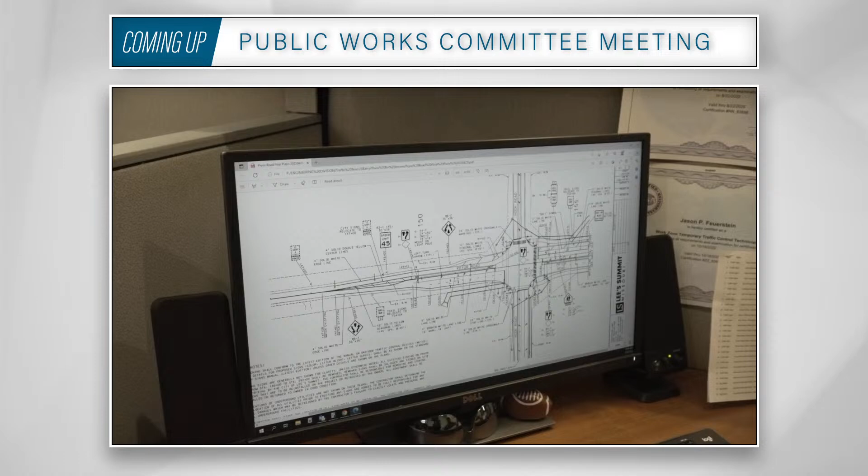Our traffic engineers go through and do field studies. They'll send us down an engineering work order for us to go out, place new signs or remove signs as needed. Coming from the material, our blanks come in and they're just aluminum blanks. We can put our white, our red, our fluorescent yellow, green, whatever. Basically what it looks like is just that there.

Throw it up into the roller. And once we got it covered, take it to our work table here, and Tim will cut the corners, cut all the excess off to where it's lined up right.

As far as the plotter and the software that we use, there's a street name sign there, and he's gonna go ahead and print that out on the plotter so you can see the plotter and how it operates and runs. There's standards for the height, even just on letters on the sign blank. Basically what we have on the computer there is pretty much set up to those. And it goes through, it's got a very small but sharp needle that goes through and cuts everything out letter by letter.

Once that's done cutting, our next stage would be bringing it over here. Currently picking out the sign letters right now. We call it weeding or picking, or however you want to call it. Next, putting it on the transfer tape.

Then after it's taped, we bring it over to the roller. That's where we apply it to the actual sign blank. We'll roll it through one time just to get the air bubbles out. And the last stage is basically just taking the transfer tape off the front of it. And there's a finished product of the street name sign.

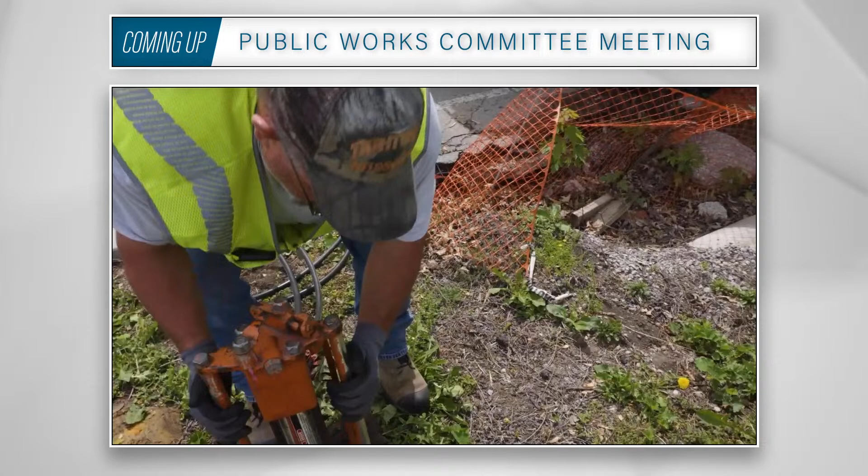Then once the base is installed, we'll go ahead and put the post in there. We've come up perfect. And that's how we do it. Simple, quick.

Smith Hat Company is coming to downtown Lee's Summit. Purchase a variety of hats, including cowboy or cowgirl hats, or unleash your creativity and design a one-of-a-kind custom hat, choosing from premium materials, unique embellishments, and expert craftsmanship. Smith Hat Company is hanging its hat here in spring 2025.

Summit Play Village is coming to South Lee's Summit near Raintree. The indoor children's playground will be for children 8 and under to promote creativity, explore family-friendly activities, and have fun. Summit Play Village is set to open in April 2025.

Street food sensation turned fast casual hit Dave's Hot Chicken is bringing the heat to Lee's Summit. Specializing in Nashville-style hot chicken and serving tenders and sliders, Dave's Hot Chicken will be arriving to Summit Woods in summer 2025.

Lee's Summit is getting 3 ice cream shops across the city. Howdy Homemade Ice Cream will be scooping its way into the Chapel Ridge Shopping Center. Howdy Homemade creates a place where everyone belongs, a shop dedicated to creating jobs for people with disabilities. The amazing ice cream served by amazing people will be coming in summer 2025.

Brewster's Ice Cream will serve Summit Woods Crossing with over 24 fresh, rotating flavors made daily. The shop offers 150 homemade ice cream flavors, including sherbets and sorbets, as well as ice cream cakes and pies. Brewster's Ice Cream is coming in summer 2025.

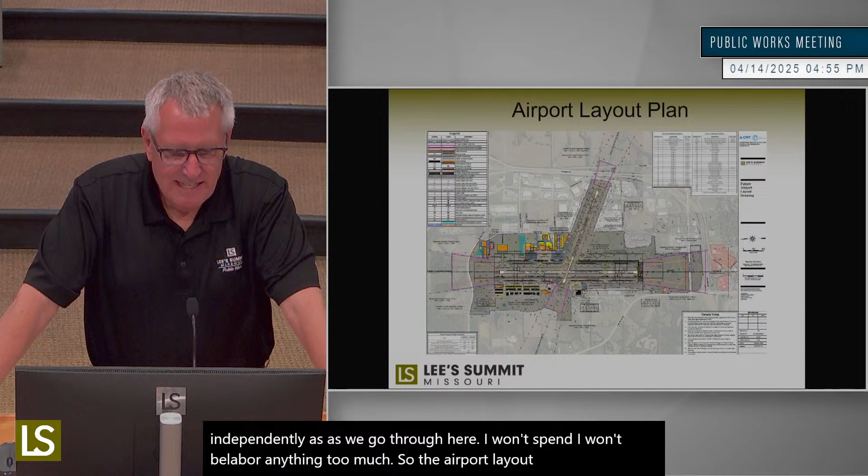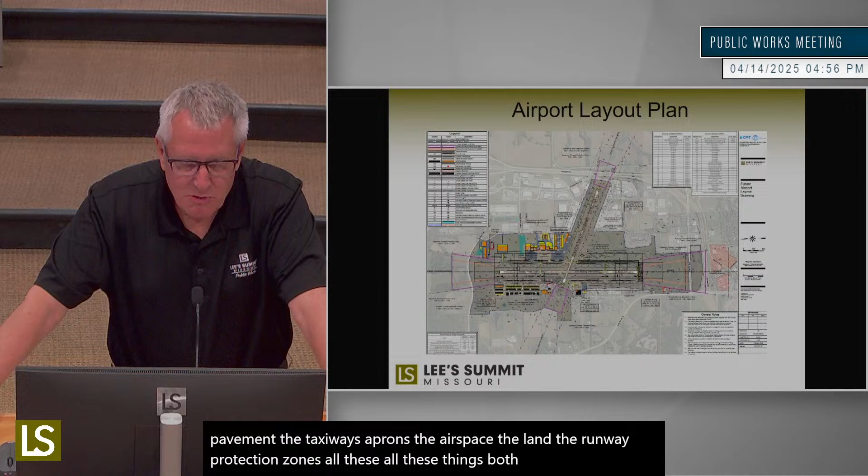So the airport layout plan, again, this is one sheet of several. It really is the inventory of our airport facilities, both current and proposed. When you think about inventory, you think about buildings, but this covers buildings, pavement, taxiways, aprons, airspace, land, runway protection zones - all these things, both tangible and intangible, that we own and control as part of the airport and the airport's airspace.

The biggest reason for this is, one, we show the existing facilities, and then we show what we want in the future, where we see the airport going, how we see it developing. This is obviously very integral with our master plan. Where are we putting hangars? Where are we putting aprons? Where are we putting the air traffic control tower? So in the future, when a hangar developer comes in and says, hey, I want to build a hangar here, we show them, based on our master plan, this is where you're going to go.

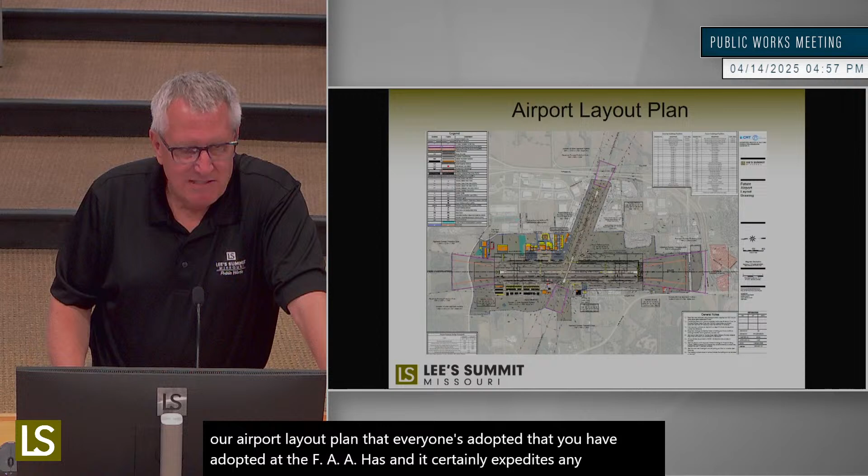We have to submit those plans to the FAA for an airspace study. First thing they're going to do is grab the airport layout plan - are we proposing a project that's in alignment with our airport layout plan that everyone's adopted, that the FAA has? It certainly expedites any airspace study if we show we're putting a hangar right where we said a hangar would be. We already know everything's fine. So that's really the high-level overview of what the airport layout plan is.

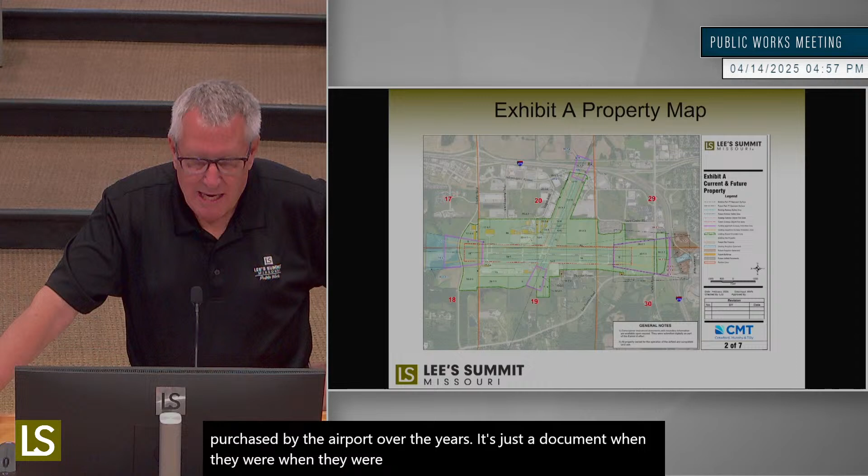The Exhibit A property map, like I said, is really a collection of all the properties that have been purchased by the airport over the years. It's just a document of when they were acquired, how they were acquired, local funds or grant funds. But like the ALP, this is also current and future property. So we will show all the current property that we have, but then we'll show potentially future property that we'll need to buy to protect future airspace.

One of the things we look at in the future is dropping the approach minimums to runway 36. Well, if we do that, we're going to have to purchase some additional avigation easements, and this map would show where those properties are and what would impact those decisions, what would impact what property we would have to buy.

A lot of these things we've talked about over the last couple of years through committee and council. We're all well aware of the air traffic control tower and the desire to eventually have an air traffic control tower at the Lee's Summit Regional Airport. We were recently accepted into the contract tower program, so we went ahead with the preliminary site study.

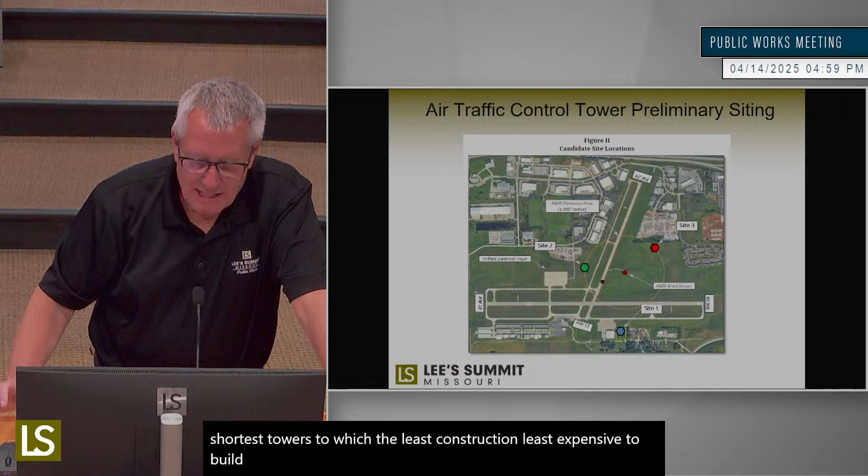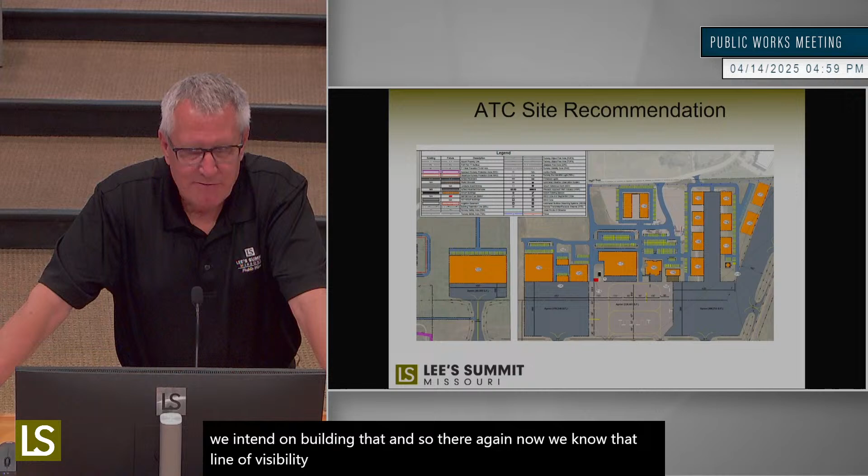And if you look at one of the sheets on the airport layout plan there on the lower right, you'll see the little orange circle - that's the air traffic control tower. So that's in alignment with the site study, and now it shows on our airport layout plan where we intend on building that. So now we know that line of visibility we have to protect, and as we develop the airport, we know that protected space and can plan accordingly.

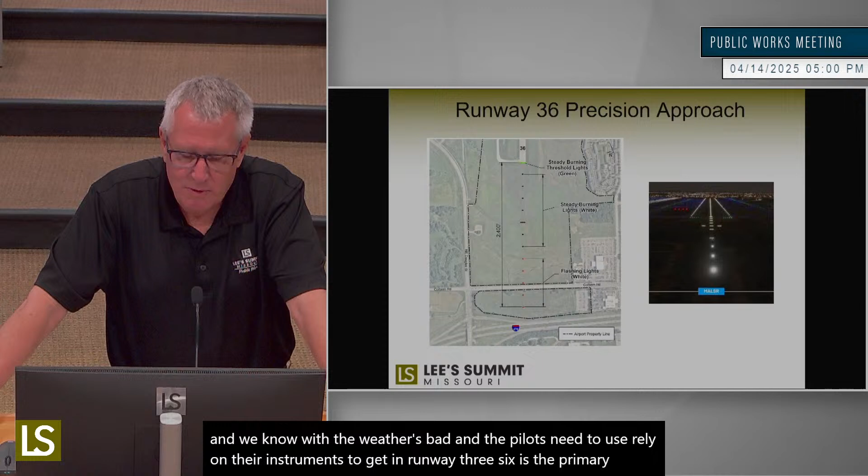Another one of the deliverables was the Runway 36 precision approach feasibility. Looking at that right now, our runway minimums for Runway 36, which is our primary runway during instrument conditions when it's wet or the weather's bad and pilots need to rely on their instruments to get in. Right now we have minimums of 7/8 mile visibility, and I believe it's a 320-foot minimum descent altitude. To get that to a precision approach, which would be a half-mile visibility and a 200-foot descent altitude, what would be required? There's really two options.

One is a full-blown ILS, or instrument landing system, which is a ground-based navigation system. Or two would be installing a MALSR, which is a medium-intensity runway lighting system that also provides cues on the runway alignment. You've probably seen these driving down the road, where you see the string of lights and the strobes shooting towards the runway. That's what these are.

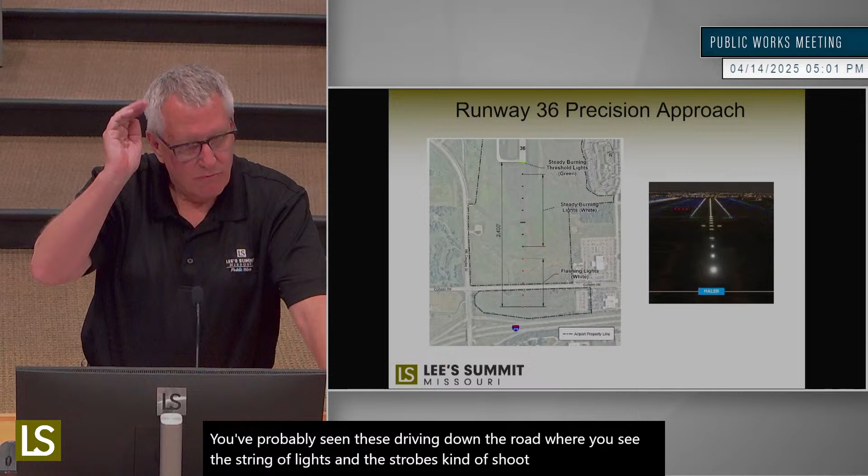Looking at the traffic and the amount of time this approach is in use, the recommendation is not a full-blown ILS. It does get your minimum descent altitude down to 200 and visibility to a half, but they're very costly to maintain, and the benefit-cost doesn't seem to truly be there. So the recommendation, and what we show in the ALP, is just the lighting system. That gets us to our half-mile visibility but keeps the minimum descent altitude at 320. So that is the recommendation on the 36 approach.

The obstacle action plan. This is the end of Runway 36, where we have our biggest problems with obstacles penetrating, or potentially penetrating, protected airspace. When I talk about Part 77 airspace, that's kind of an alert airspace. If we have trees and buildings in the Part 77 space, that means you're getting close to some protected airspace and need to look at these penetrations. So we do an obstacle action plan.

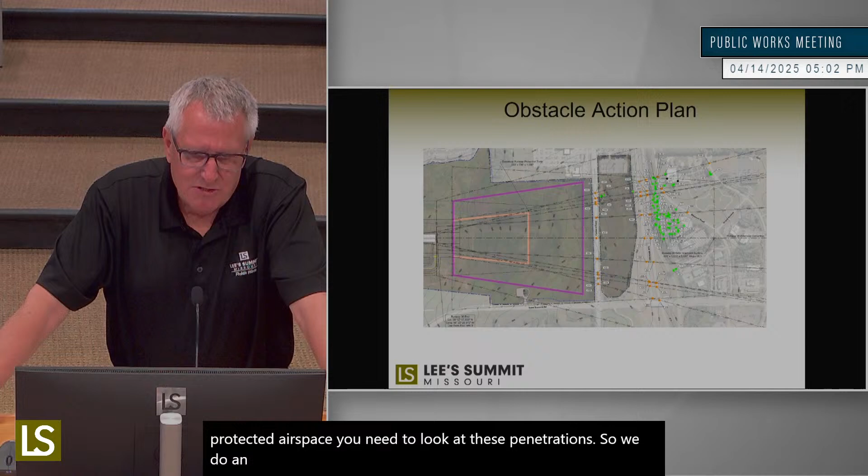Obviously, when you go out purchasing property and removing trees, it can be very expensive, and they're kind of scattered about. So the obstacle action plan gives us a way to prioritize where we want to spend our money, where we need to spend it, and where we don't necessarily need to. This will show both existing and future conditions: what the obstacles look like with 7/8 mile visibility, what they look like with half-mile visibility, and what it would take to go to that lower descent altitude or lower visibility.

Not really associated with the airport layout plan, but part of the Phase 2 Master Plan update, was the wildlife hazard assessment. You may recall over the last couple of years we've had contracts with the USDA to do this study for us. Last year we had a contract for rodenticide to take care of the rodents on the ground, which meant the birds of prey would go elsewhere and not conflict with the aircraft. We also had a contract removing coyotes and geese primarily from the runway.

So that's really it for the airport master plan update Phase 2. Are there any questions specific to that? Since I have your attention after the questions, I'll give a brief update on our airport renaming. So I'll pause here for questions on the resolution.

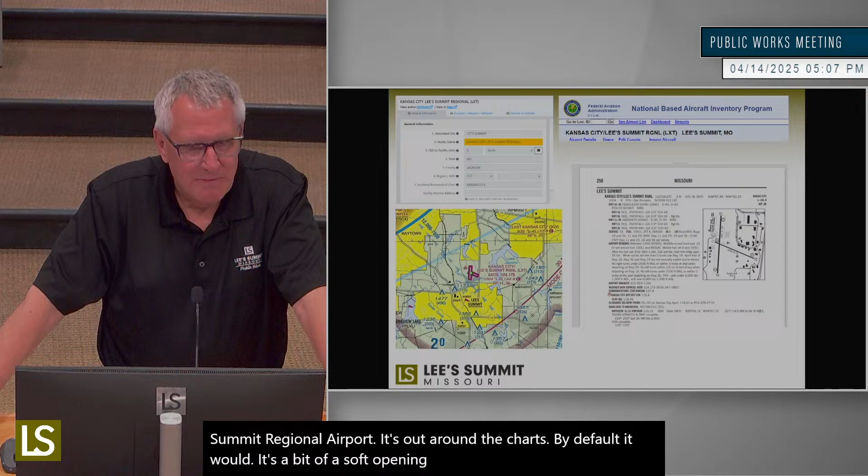Sure enough, as we go into our aviation charts on the website, you'll start to see Kansas City Lee's Summit Regional Airport on the chart. So it's happened. We are now officially the Kansas City Lee's Summit Regional Airport. It's out there on the charts. By default, it's a bit of a soft opening. We get it approved, and then little by little, all the charts are updated. And we've had transient aircraft coming in calling in Kansas City Lee's Summit Regional traffic.

So the next step, as we talked about, was once that got out there, was the marketing. And that's kind of the fun part.

Summit Aero, as you recall, is the name for the city-run FBO, fixed base operators, that provide all the world-class, excellent customer service at the airport. What you see here is the end result of a lot of collaboration with the aviation community, with our fuel vendor, with creative services, looking through many different options, maybe a little bit of help from AI, I'm not saying. But through all that process, this is the logo that we came up with for Summit Aero. It looks really good on shirts. We're excited to move into Hangar 2 where we can start branding this in full force.

Kansas City Lee's Summit Regional Airport. We also wanted to have a logo for the airport. Again, we went through a lot of different thoughts and concepts, looked at different airports. We really wanted something that was simple, yet bold, and we came up with this design. Honestly, I can't even say how we ended up on this design, because we had a lot of stuff out there, but everyone kind of gravitated to this.

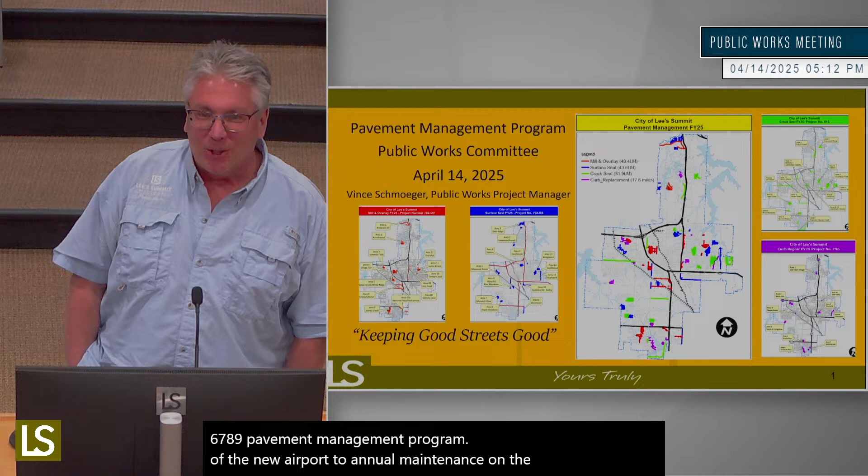Excitement of a new airport aside, this covers annual maintenance on the pavements and curbings. This is going to be a review of our four main projects on pavement management: the curb, the overlay, the surface seal, and the crack seal. The pictures currently on the screen were last year's programs. With the individual projects and then the yellow label, you can see when you put them all together, it does look like we cover a lot of ground every year.

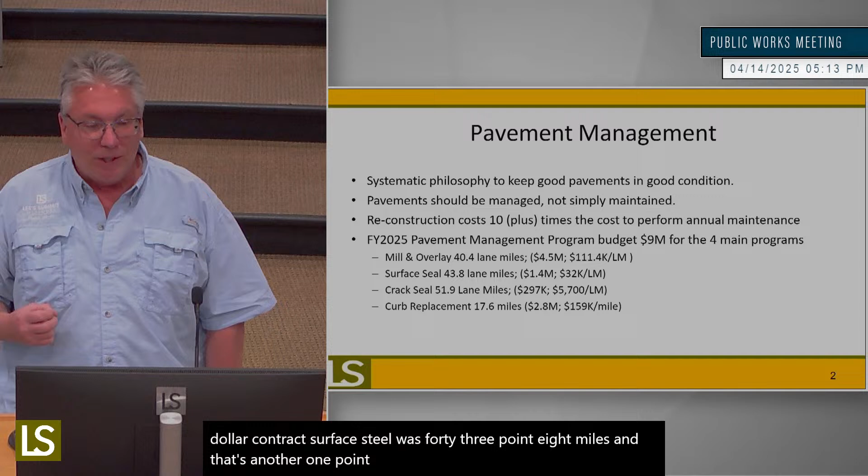Here's just the idea of how many miles of street we have. Asphalt, we actually have over 1,000 miles of asphalt street, divided into over 5,000 sections. So trying to keep track of all the sections and how they relate to a neighborhood - a section is simply one intersection to the next as you're going up a street. You may have a 1,000-foot section, or a 100-foot section on some of the older areas where we have offset intersections.

Funding - our primary funding source for this is the half-cent transportation sales tax. We also get money from the 15-year CIP tax, and we have in the past had some money come in on special bond issues that rebuilt curb, getting a bunch of arterial, some of our larger streets, curbs redone as part of that. Maintenance is also supplemented with the operations division - they use $204,000 a year for curb replacement and another $236,000 for potholes, plus another $1 million for working on larger repairs in the streets.

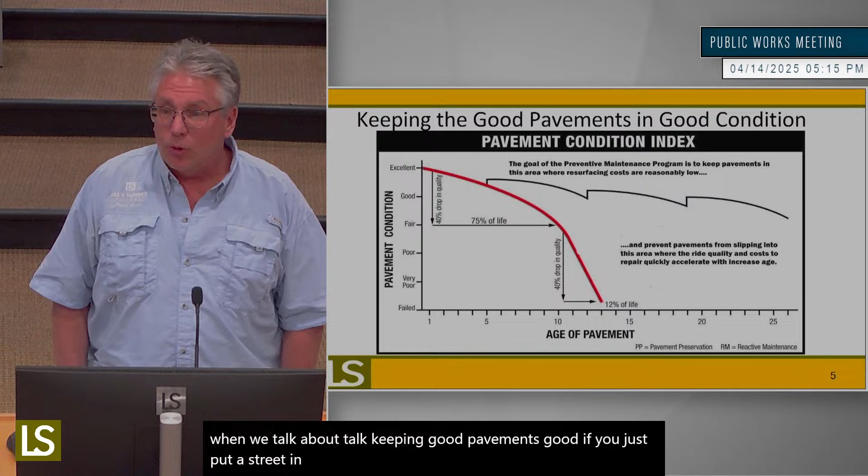We talk about keeping good pavements good. If you just put a street in and don't do anything with it, this is the red line - it just falls off, and over time it naturally decays into gravel again. But if we get in there every so often and do the overlays, the surface seals, or the crack seals, we protect the street and we're able to extend the life of the streets.

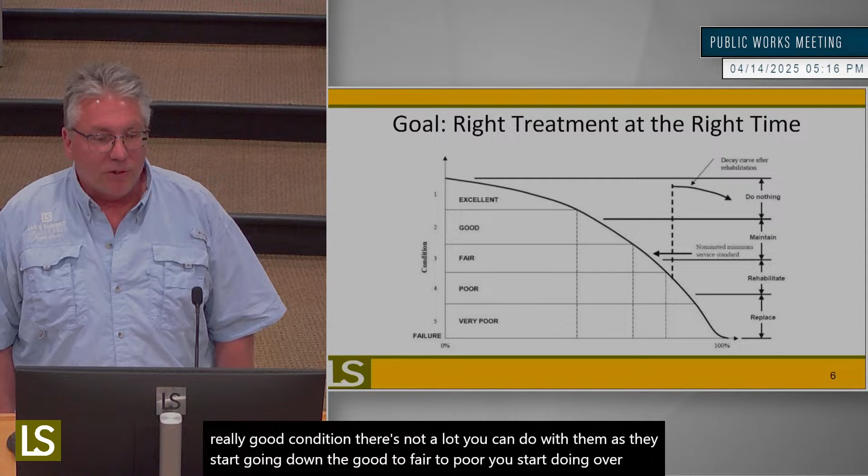Similar to the previous one, this chart gives you an idea of when streets are in really good condition, there's not a lot you can do with them. As they start going down to good, to fair, to poor, you start doing overlays. Good and fair condition is more of a crack seal and surface seal program. When you get down into poor conditions, then you're definitely getting into a mill and overlay, and we're trying to get, currently we do about 20 to 25 years on an overlay.

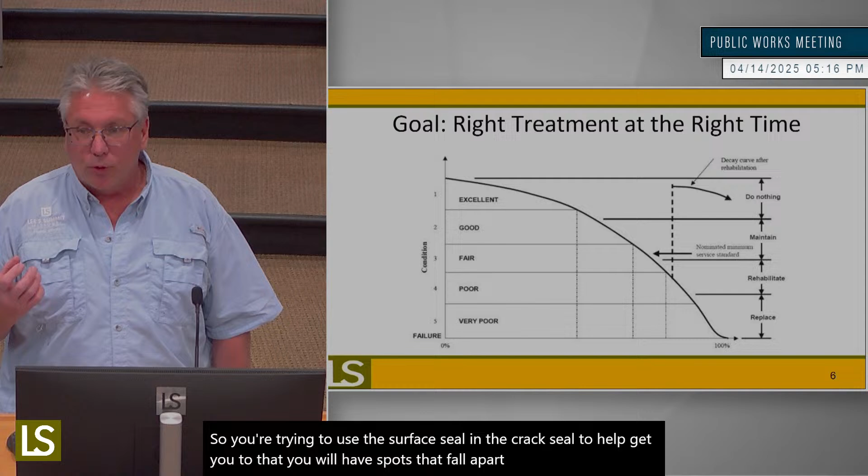So you're trying to use the surface seal and crack seal to help get you to that point. You will have spots that fall apart, potholes or rutting, that operations can come in and actually make repairs on these streets.

So just kind of our pavement cycle, we assess what's the condition of the pavement, analyze it and put it together in our Paver program and our GIS maps, and see what our funding is going to be for the year.

Then we create a plan, trying to stick with neighborhoods for cost effectiveness. When you're doing an overlay across large areas versus a street here and a street there, you're going to start paying a lot of transportation fees for the contractor.

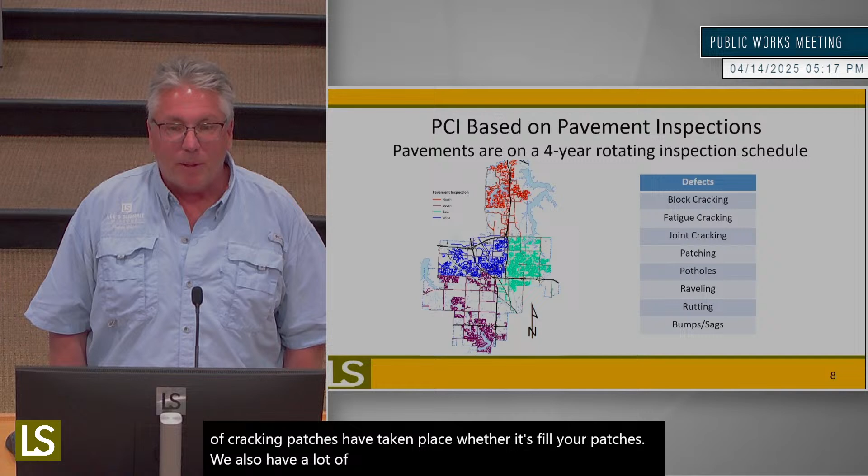Our pavement inspections are based on a 4-year rotating basis, and we go in and look for different types of cracking, patches that have taken place, whether it's failure patches or utility patches, shoving, rutting, and whether the road is rough, and what's causing that. These are the type of items we look at when inspecting the streets.

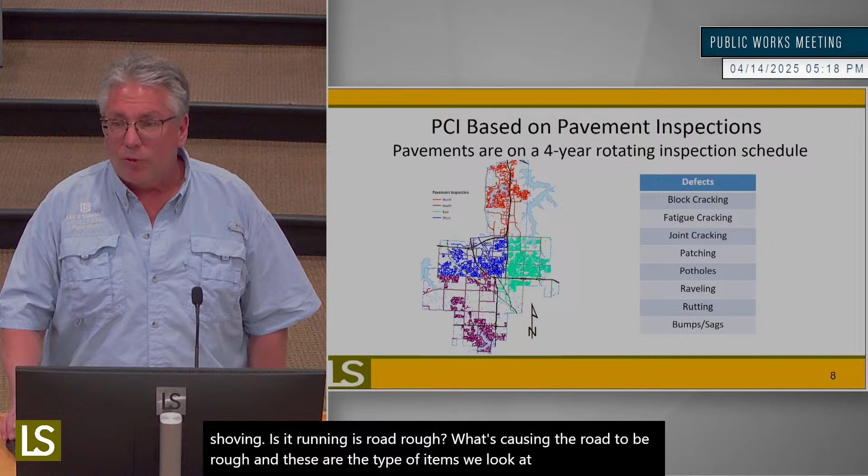After the street inspection, we plug it all into our program called Paver, and it kicks out numbers on what's the condition of the streets, from 0, which is a very bad street, to 100, which is a new or freshly overlaid street. Our current average is 73, which we feel is pretty exceptional.

And we get up into the 75 to 89 range, it's more of a surface seal and crack seal program, which usually takes place about seven years after an overlay, sometimes 10 years. This has been kind of the paving history in Lee's Summit.

1992 was the first year we actually came up with a design and construction manual. This is a set of standards used to dictate how we build streets - not where, but how. Before, it had been on an approval basis. This actually gave us specifics: we're going to use this much asphalt, we're going to use this type of asphalt.

This initial program, because of the building going on at the time, we had a lot of input on this from the development community, the people that build the roads, the developer crowd - just what can they do to keep it. We're not asking for the gold standard necessarily, but would still give us a solid street.

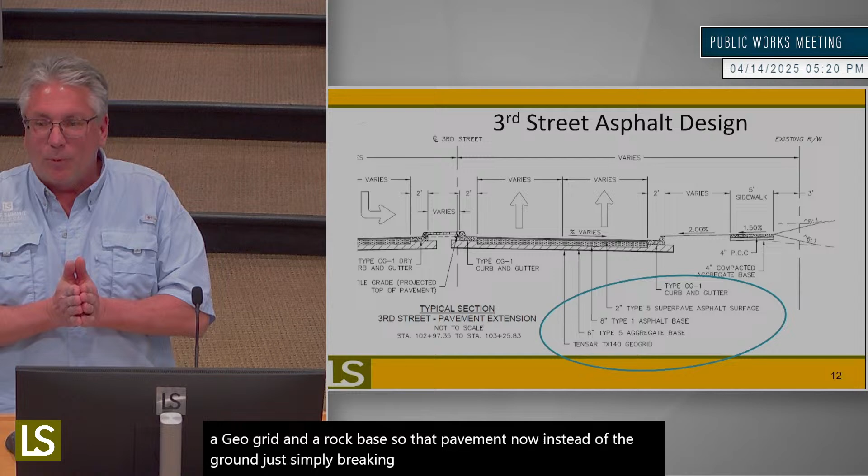In 2011, we actually came up with a 35-year lifespan. Prior to this, our asphalt streets were actually put on a clay base, which dries out and cracks. So in 2011, we were able to go to this - in this circled area, you can see where underneath the base we actually have a geogrid and a rock base. So that pavement now, instead of the ground simply breaking and reflecting up through the street, it actually has a place to slide and make movement without affecting the road near as much.

And then last year, 2024, we updated to a higher grade of asphalt called Superpave. It has better materials in the aggregate and increased the amount of oil in there, so it's becoming smoother and tighter, more water resistant, and should hold up better and be longer between crack seals and surface seals.

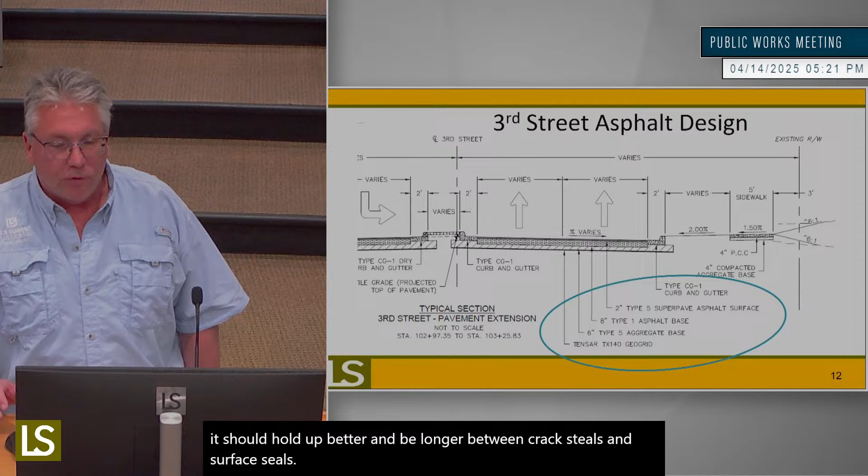Okay, this is 3rd Street. This was the design for 3rd Street between Murray and Pryor a couple years back.

So we're working to improve initial construction, doing things like better aggregate and oil. Mill and fill construction is just a different way to pave, to where we have stronger edges on the wider road, so the pavement actually gets fully rolled and compacted together.

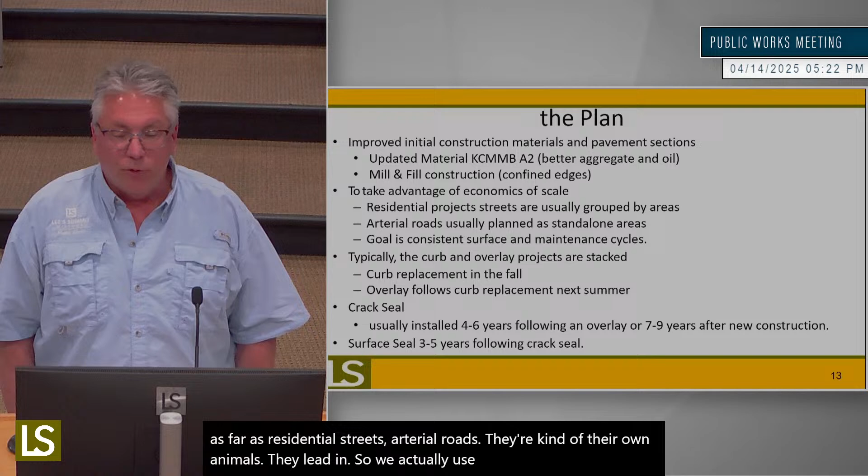Keep taking advantage of the economics of scale, keeping projects together as far as residential streets. Arterial roads are kind of their own animal, so we actually use those more as standalone projects. And we stack our curbs in our overlay programs. You'll notice that roads that we put curbs on are typically overlaid the following year. This year's an example: we have 15 areas on the overlay program, 10 of those from curb replacement programs last year.

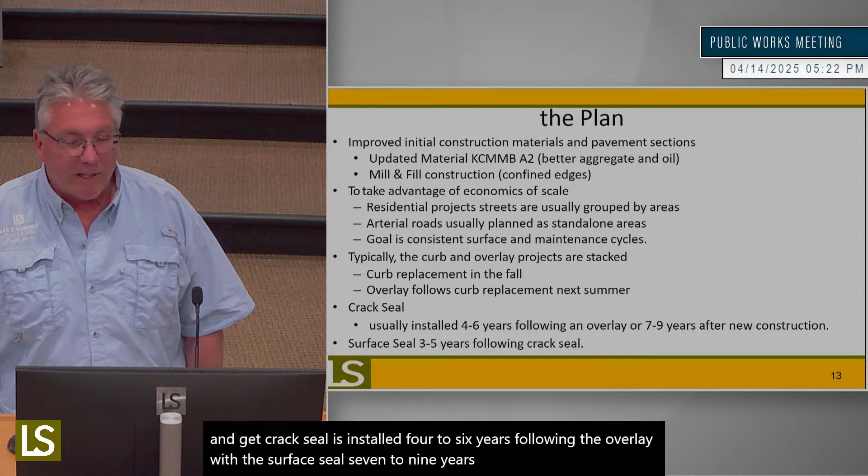Just a quick synopsis of the programs. I've got these in order that we typically do them: starting with curb replacement, then overlay, crack seal, and then surface seal.

So curb replacement, we've seen curbs around Lee's Summit like this, ones we're trying to replace. We've got most of the bad ones out of this program, though you'll still find them here or there. It replaces the damaged, deteriorating curb, and we do update the sidewalk ramps to current ADA standards so we're in compliance whenever we're going through there. Last year's program was 104 ramps.

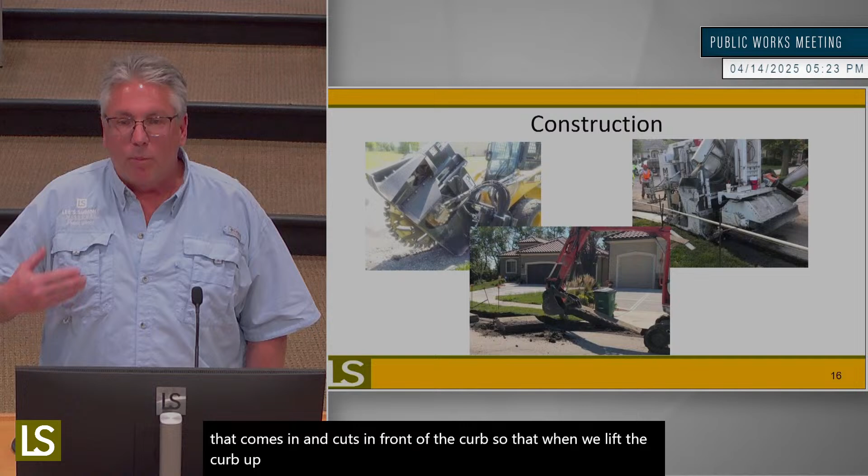For construction, top left, you have the big wheel that comes in and cuts in front of the curb so that when we lift the curb up, it's not going back into the yard. We're trying to lift it up as clean as we can without disrupting the yard. The top right picture is the curb machine putting the curb back down. This is actually an older picture though - the new curb machines are using GPS. They don't even have a line to follow anymore, it's all through GPS. Some pretty good technology they're using out there.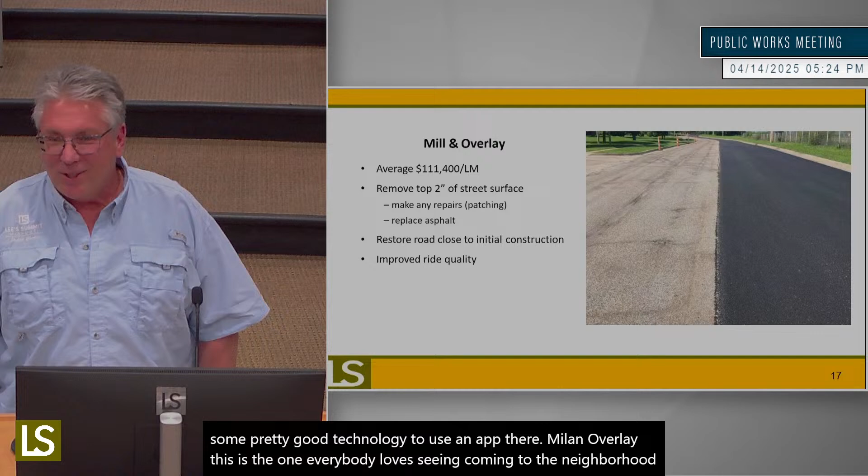Mill and Overlay - this is the one everybody loves seeing coming to their neighborhood because it means we're getting new streets. We remove the top 2 inches of street, restore the road close to initial construction, and improve ride quality.

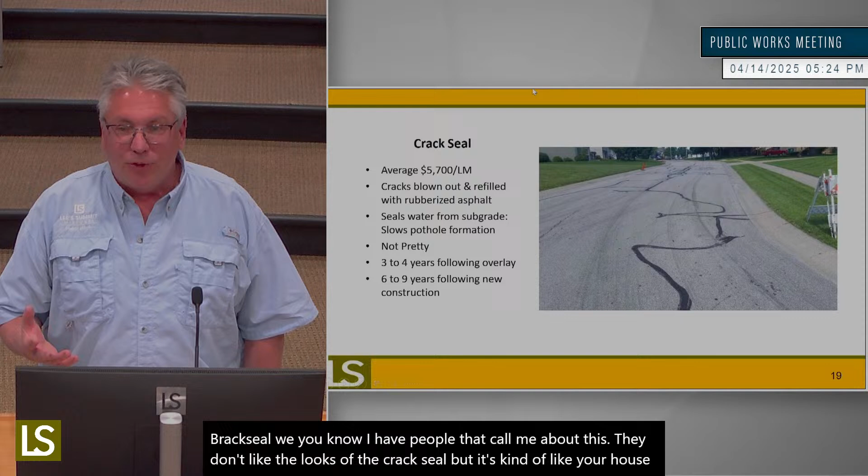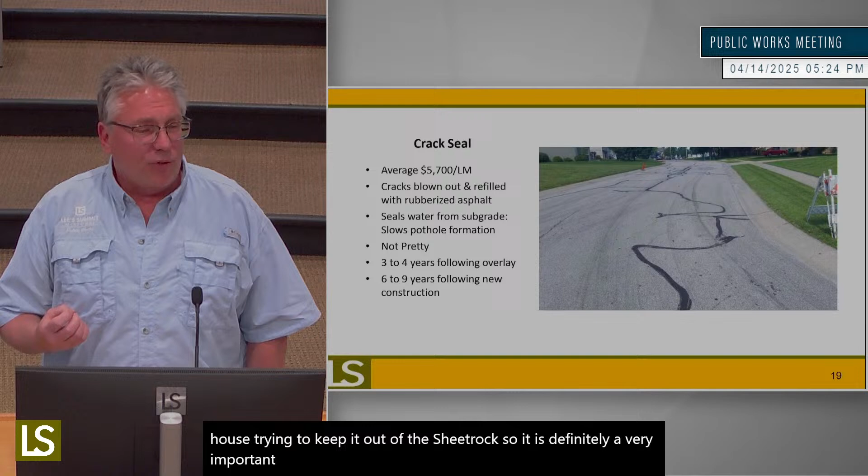Crack seal - I have people that call me about this. They don't like the looks of the crack seal, but it's kind of like your house when you use caulking in the shower or around the sinks. You're trying to keep the water from getting through the subgrade, like keeping it out of the sheetrock in a house. So it's definitely very important and is actually one of the most economical processes we can use.

For construction, it's hot tar asphalt put in, and these guys with the squeegees are just trying to keep it tight and not let it go all over the place.

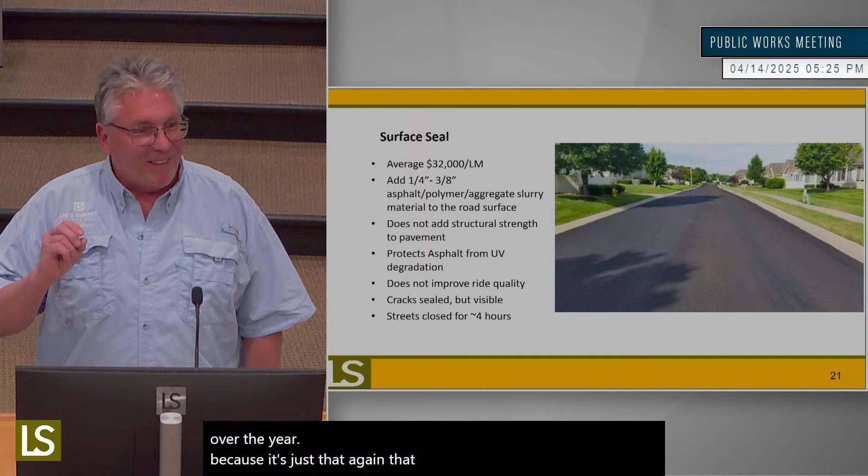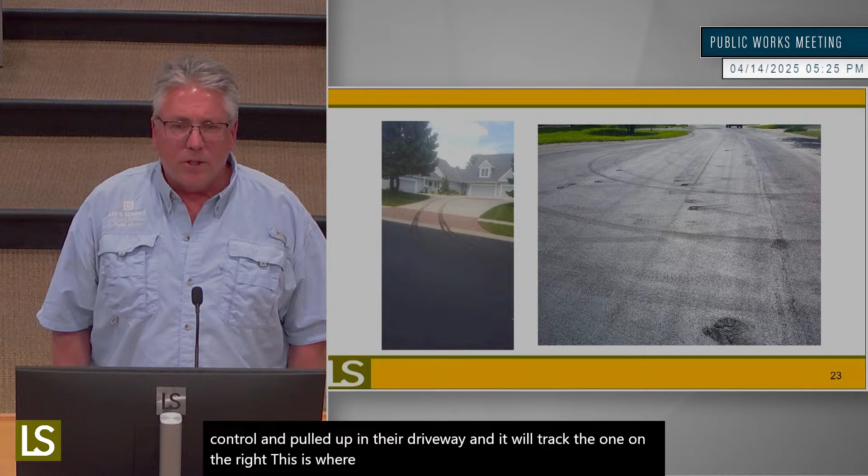That being said, the picture on the left is just somebody that went through the traffic control and pulled up in their driveway, and it will track. The one on the right, this is where I get a lot of calls, especially in the cul-de-sacs with people making turning movements, stopping and going out of their driveways. These are actually okay. This is right after, within the first week, this material calms down and loses its shine. It looks more like asphalt that's been driven on. These marks will still be there, but if you look at them, they're in the surface, not digging down through the material.

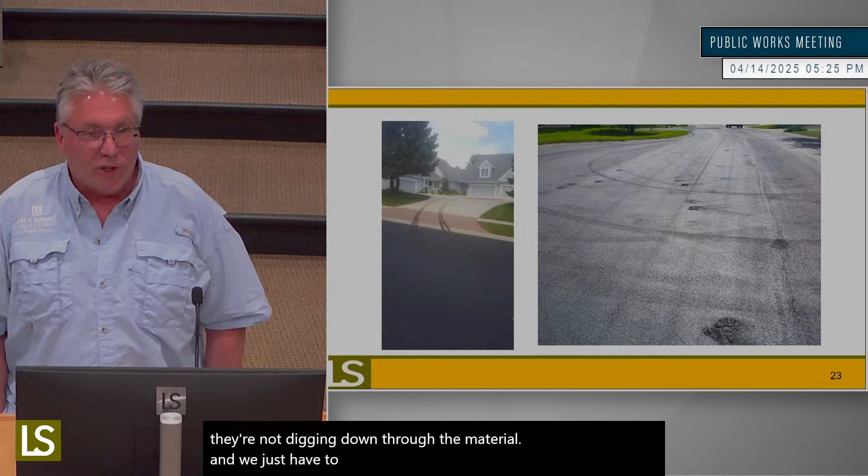We just have to watch - we try to coordinate with the trash company so they can be down for a couple days. Doesn't always work, but we try.

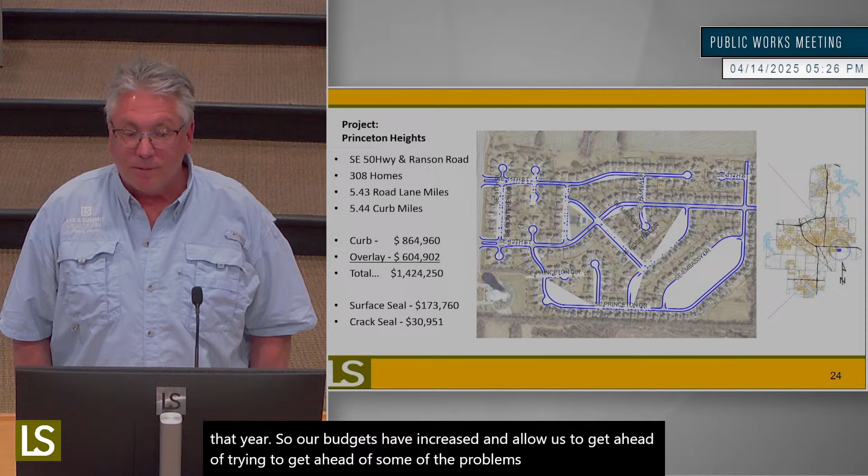So I know when we overlaid this in 2009, 16 years ago, that was the only project we had in curb that year. Our budgets have increased and allow us to try to get ahead of some of the problems we have. Surface seal would be about $175,000, and crack seal is $30,000. That's why we like getting in the crack seal - if we can preserve the road before it gets wet underneath, causing potholes and failures, we're definitely money ahead. I believe that's it. Any questions?

Thank you. Councilmember Rader? Here. So Vince, I'm guessing that you prioritize where you're going by condition, but how do you know? Do you use the GIS mapping service to determine the condition of it, or do you guys actually drive around everywhere?

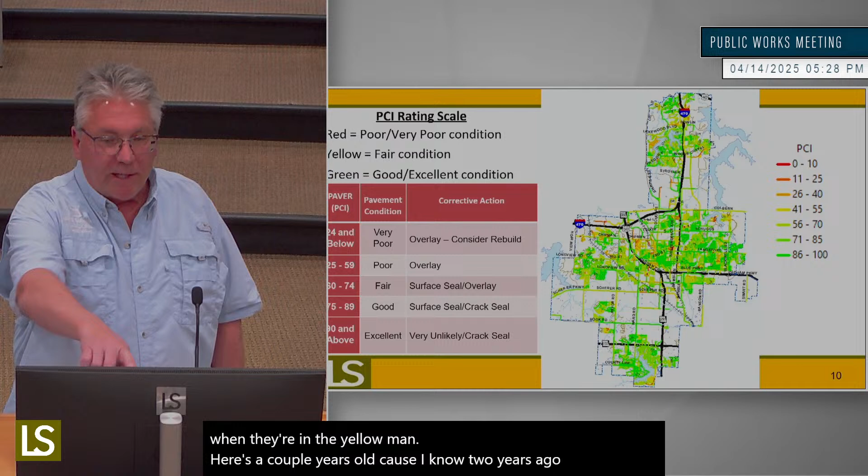This map is a couple years old, because I know 2 years ago up there in Lakewood, the tree name streets have all been overlaid. But we look at this, and as we inspect streets, the colors change, and we can look for hot spots. And we always drive and confirm what we're looking at to make sure everything's in the condition we think it is on the maps.

That technology that you can use - isn't it fun? It's fun, yeah. Yeah.

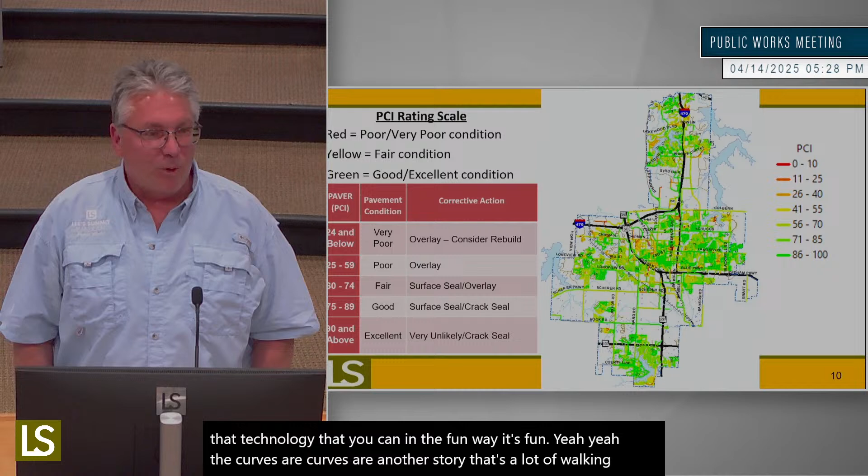The curbs are another story - that's a lot of walking. We know where they're at and the years built. We have kind of the same map, but it's still more of a walking and making sure. Thank you. Thank you, Chair.

I don't know who this question's for, and it's really not in here, but I'll ask it. Ward Road past 150, where we went ahead and remade that road - it's in Cass County, but it's almost into like Peculiar, or whatever that turns into right there. Raymore, right? And it's concrete.

County line - we concreted at the county line to 163rd Street. And that's the strip. Raymore just did the extension from there out to 58. So how long ago did we concrete that? Do you remember? Is that 7 years now? 5?

So on that, I remember when we were concreting that, he said we were going to look at that and see if it lasted longer than some of the others. Have any idea of that yet? Hey, sorry, I should have waited.

Okay, good evening, George Binger, city engineer. Concrete definitely has a longer lifespan and requires a lot less maintenance. If you think in terms of Ward Road in front of Lee's Summit West High School, it was installed in 1999. For that road, the only maintenance we've done is some panel replacement - a few locations where the slabs have cracked or heaved, we've gone in and replaced that. But we haven't had to do any surface maintenance or anything of that nature.

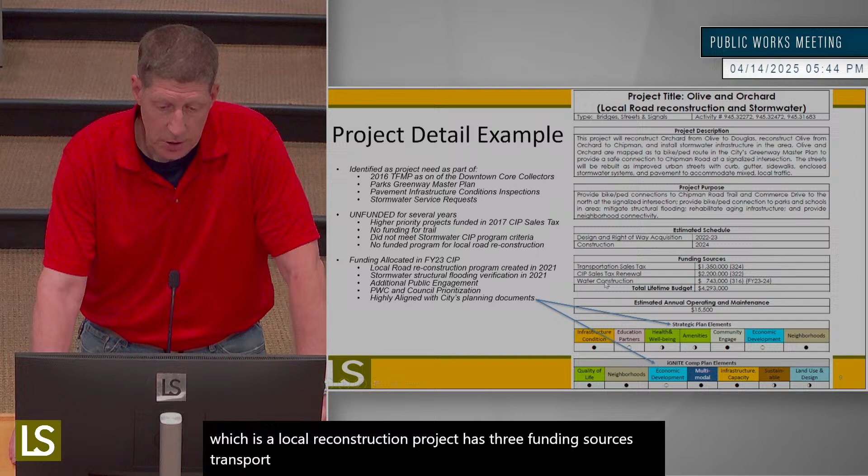So in the CIP, this is an example of a detail sheet. What this is trying to show is we'll walk through the purpose, or the project description. We identify the specific funding sources here, so you can see that this particular project, Olive and Orchard, which is a local reconstruction project, has 3 funding sources: transportation sales tax, our CIP sales tax, which also includes stormwater, and then water construction because there's some water main relocation.

We try to tie it back to our strategic plan and our comprehensive plan. With the strategic plan, we're kind of looking at current condition, and with Ignite, we're looking at the growth or future condition. That's how these differ a little bit in our bubble charts.

So when you look at the CIP, that's what you see in the detail sheets. These are available online in the online version. They will not be in the summary report presented tomorrow.

Okay, so talk a little bit about revenue and expenses. Again, this is getting back to this cash flow, looking at the CIP sales tax. When this was first presented in 2016 and 17, we were looking at $150 million over these 15 years. That's what this gold line is representing. So that's how this program was developed.

Since then, we have added the use tax, which is providing about $2 million per year to this program. Sales tax revenues have exceeded our expectations. And then, as I mentioned, we have significant grant funding coming into these capital projects.

So what we're looking at here, the red line is showing our actual expenses to date, and this includes inflation. When we looked at 2017, obviously we weren't forecasting COVID. We weren't forecasting 20% increases or 30% increases in construction costs at that time. Now, more recently, that construction cost index is starting to level out. I think it's closer to 3.2% average over the last 3 years, so we're starting to see that level back out and be a little more predictable.

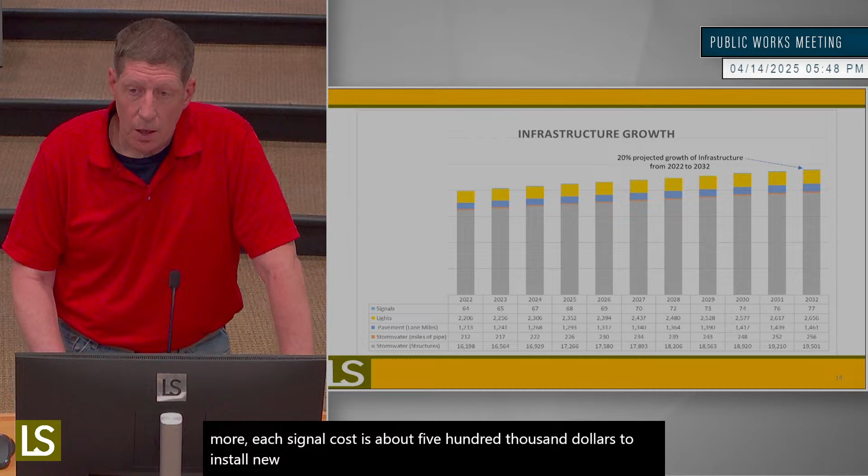So we're looking at a 20% growth of infrastructure from 2022 to 2032. As you can see here, just the raw numbers, we're adding signals. We're at 64 or 67 signals, and we're looking at adding more. Each signal costs about $500,000 to install new, and then there's the annual maintenance cost, just the electricity. Controllers have to be replaced every 5 to 10 years, the video detection too, so there's a maintenance cost associated with that. Street lighting, as it's added, increases our annual utility billing, which again is coming out of the operating budget.

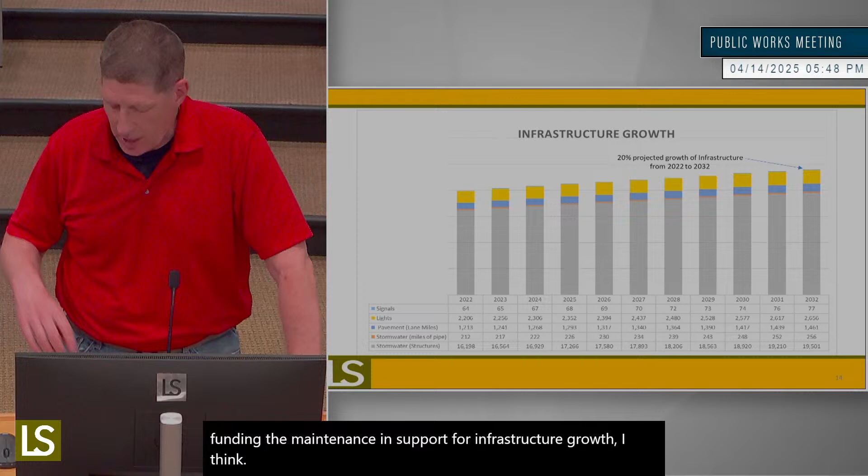So this is just presenting this as something to consider. I think this is a bigger conversation for a later time about how we look at funding the maintenance and support for infrastructure growth. Some of the topics you discussed before about life cycle costs and pavement would have a huge positive impact on this.

Going back in time, looking at some of the past councils and actions by the community that were somewhat visionary. In the 1980s, they adopted this transportation sales tax for 1/2 cent. At the time, that was intended for large capital projects. Back then, the overlay and pavement maintenance programs were coming out of the annual operating budget, but as the infrastructure grew, it outgrew the operating budget. So we were able to use this fund, this capital maintenance fund for significant improvements, for that.

With that in mind, now we're looking at how do we build new projects. And of course, that's been the continuation of the 1997 sales tax. We had the excise tax that was permanent, and 1997 was a 1/2 cent sales tax, which has been renewed twice since then.

Parks and Recreation, you'll see a lot of their capital projects are funded through this 1/4 cent sales tax through Parks and Rec.

What I forgot to mention on the sales tax too, we're using that for just general right-of-way infrastructure so that we can cover things like the railroad spur maintenance. We have 2 railroad spurs that the city owns, and every now and then we get a call from Union Pacific saying they can't service it anymore because it needs new ties, or the rails need to be straightened, re-gauged, things of that nature.

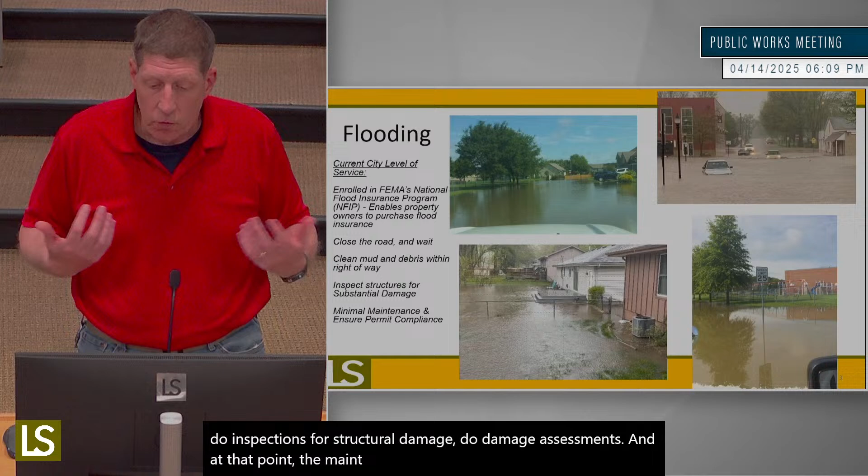Post-flooding cleanup, we go out and in certain areas, like if it's in a mapped flood hazard zone, we have to do inspections for structural damage and damage assessments. At that point, the maintenance is very minimal—usually cleanup. If we have a clogged pipe, we jet it out; if we have a clogged inlet, we clean it, and that's pretty much it. But there's really no improvement or action for potentially mitigating the risk of future flooding.

Areas of repetitive flooding are areas we track in Public Works as part of our flood insurance program, the community rating system program, where we have to keep track of repetitive flooding. This area here on the left is Oak Ridge Meadows along the Little Blue River. This is showing the currently mapped flood hazard area, and this stretch of properties has a history of flooding repeatedly.

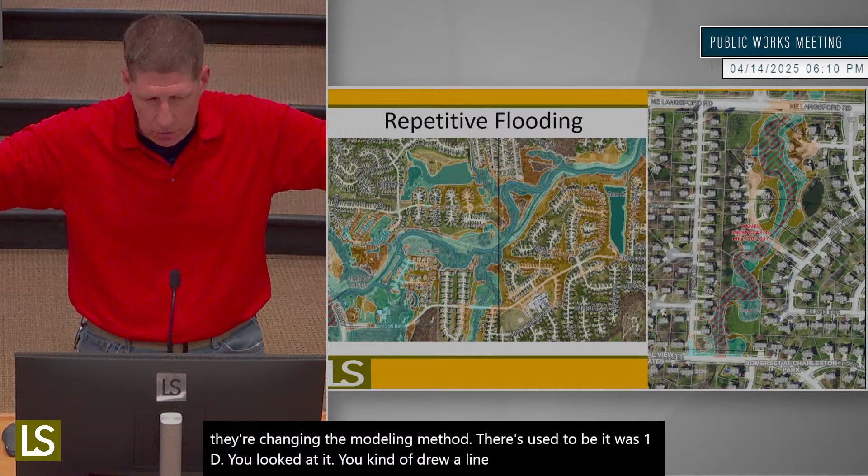Looking at what's happening going forward, FEMA, or SEMA, the State Emergency Management Agency, is in the process of remapping the Little Blue watershed. The rainfall data keeps getting updated, and it usually means there's more rain per storm event. They're also changing the modeling method—used to be 1D, where you'd draw a line for your flood elevation. Now they're using two-dimensional modeling, which is supposedly more refined. The Corps of Engineers has done a study on this area as well.

We're seeing two proposed models that show most of this area being inundated in a 1% storm event. That's proposed—when those come out, there's a period of public comment and review and back and forth to get the final version. But understanding what the stormwater modeling people are looking at, there's the potential for a significant increase in the number of properties at risk to this type of flooding.

Over here on the right, this is an area on Langsford Road, this is Battery Drive, and there's a culvert here that regularly overtops. This is an area where in 2007, this home was not in the flood hazard area. If you look at it now, it is. That meant in 2017 they received a notice from their mortgage company—they had to obtain insurance after this remapping sequence.

So those are some of the things that we're not really able to account for. We don't really have a way to address it. In our current level of service, we really have no method, funding, or program to address or mitigate risk for this type of stream flooding.

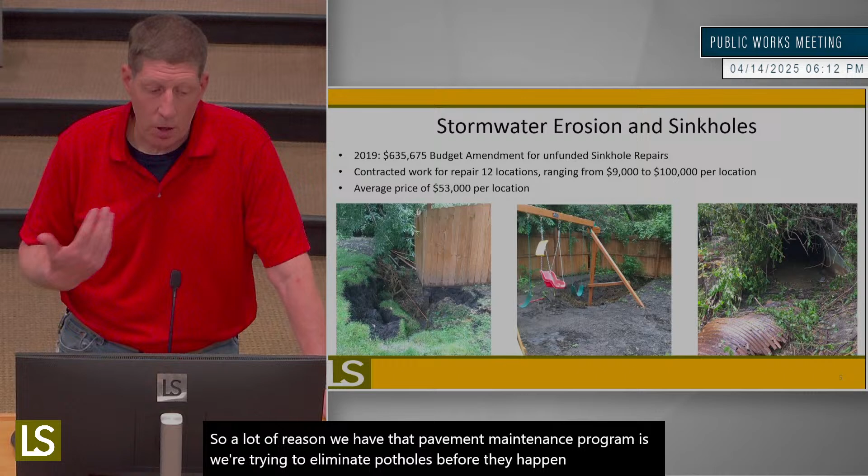Well, currently we have no means to do this. So when we get a sinkhole open up like this, where somebody's fence post, their backyard, probably their cable or Google Fiber line coming to the house, or a neighborhood swing set, forms this large sinkhole because this metal pipe here has collapsed.

An example of this happened in 2019 where we had a sinkhole that was threatening a tree falling onto a house. We had to do an emergency budget amendment, emergency repair for over $600,000 for that one event. That just addressed one sinkhole.

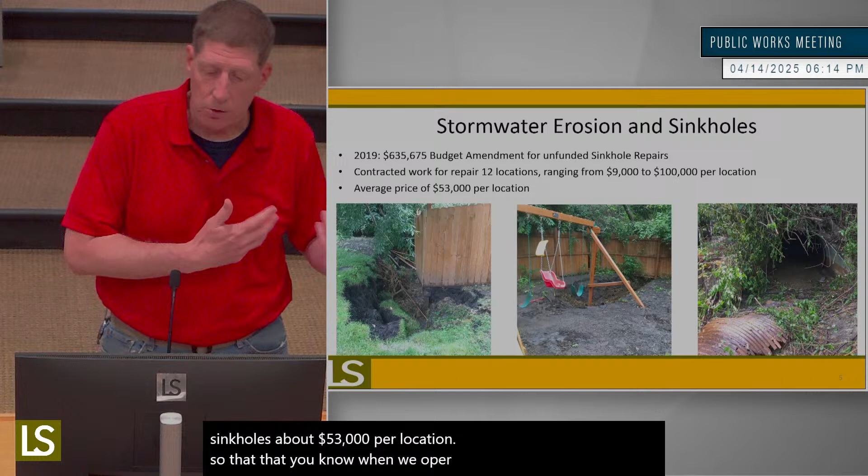Periodically we have big projects that aren't beyond the capability of our crew, just beyond their capacity. Their workload cannot get to these. So if we have to contract repair, we look at anywhere from $9,000 to $100,000 per location, bringing our on-call contract in. The average cost for repairing a sinkhole is about $53,000 per location when our operations crew has to go out and fix it.

One of the biggest factors in all this is corrugated metal pipe. It became common practice generally in the 1970s and 80s, because before that you either had concrete pipe or clay pipe. Plastic pipe hadn't been invented yet, wasn't common at that time. When it's first put in, it's a solid structure, it can support loads. But the problem with corrugated metal pipe is it will rust and corrode.

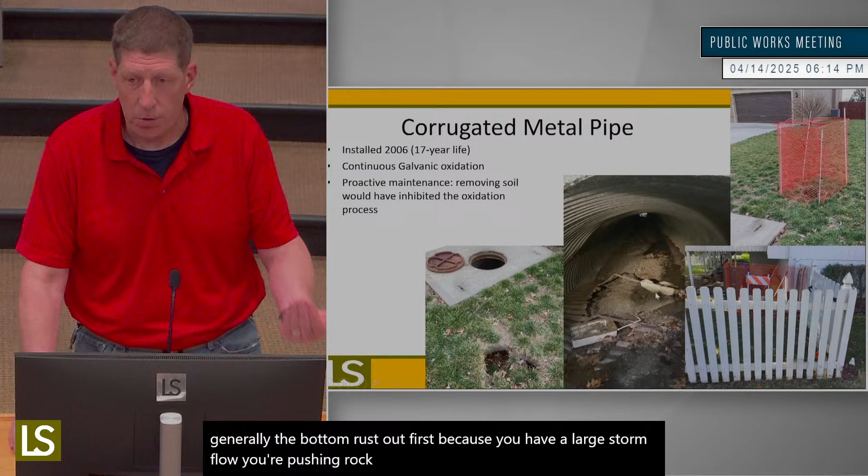We have corrosive soils. Clay will create that galvanic or chemical reaction between the clay and the metal that will cause the bottom to rust out. It can start, generally the bottom rusts out first because you have large storm flow pushing rock and debris, scratching that galvanized coating off. That allows it to rust.

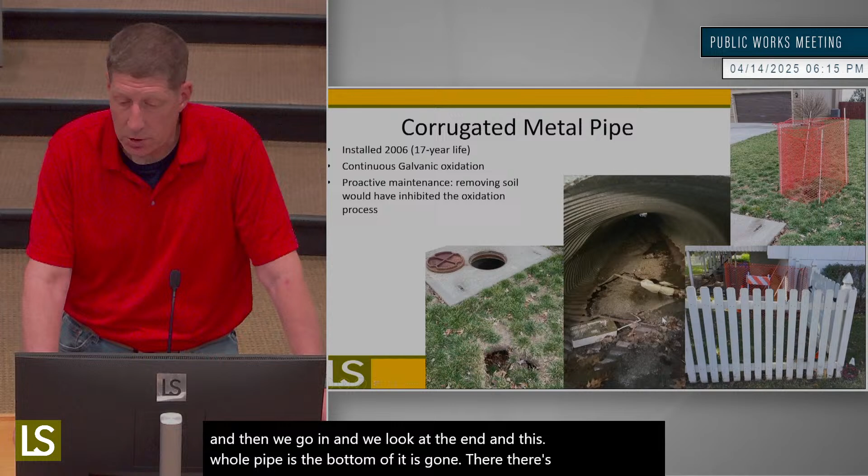What you're looking at here, this is what it looks like on the surface - you see this little hole. Then we go in and look at the end, and this whole pipe's bottom is gone. There's not much there. So our current level of service is we go out, put an orange fence around it, and we'll come back and fix it when we can, because then this gets back to capacity for our crews.

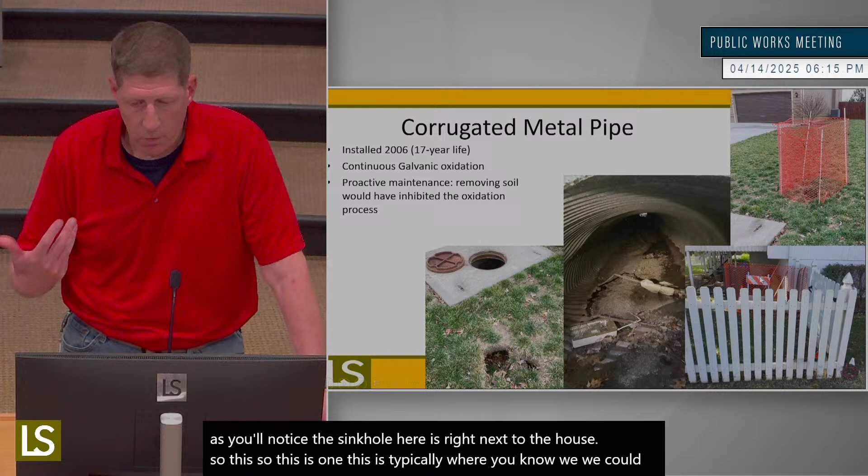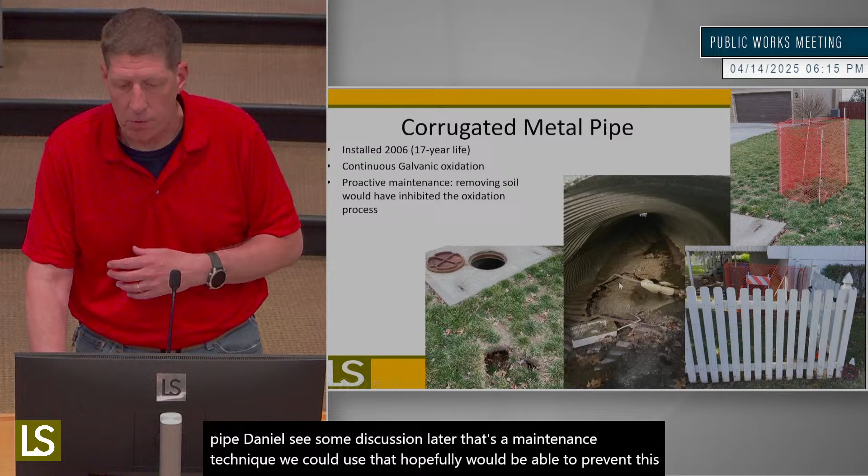The example down here in the bottom right - notice the sinkhole is right next to the house. This is typically where, if we had to go through contract repair, we're basically trying to do it like a trenchless repair where we can reline the pipe. You'll see some discussion later - that's a maintenance technique we could use that hopefully would prevent this type of catastrophic failure in the future. But we currently don't have that capacity or level of service.

Streams and water quality - that's another issue related to stormwater. This being a sewer main that's exposed. Unfortunately, that's more common than what we would like. Generally, because sewers follow gravity, the stream is a low point. And as streams move over time, they may encroach upon a sewer main.

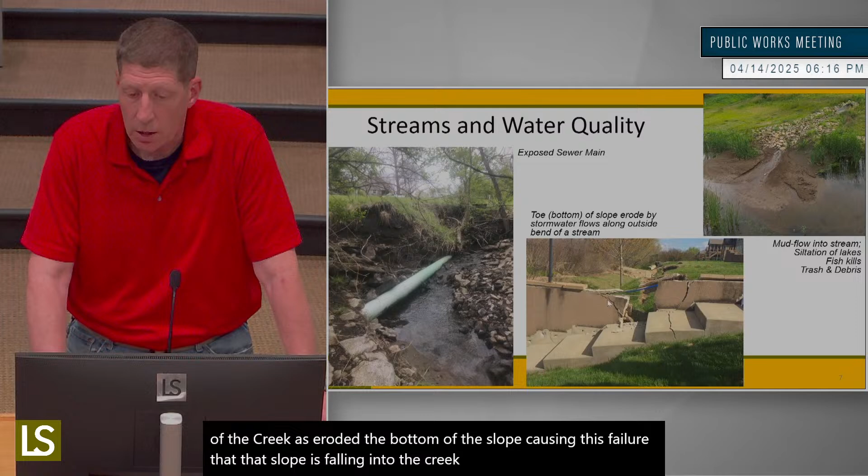Sometimes we have sewer and water main crossings. This is an area where at the bottom you see the trees - the bottom of these trees are along a creek. Erosion along the outside of the creek has eroded the bottom of the slope, causing this failure. That slope is falling into the creek in the backyard here. We also have this other issue with water quality, where if you get large amounts of mud flowing into a creek, that tends to kill whatever aquatic life may be in that stream.

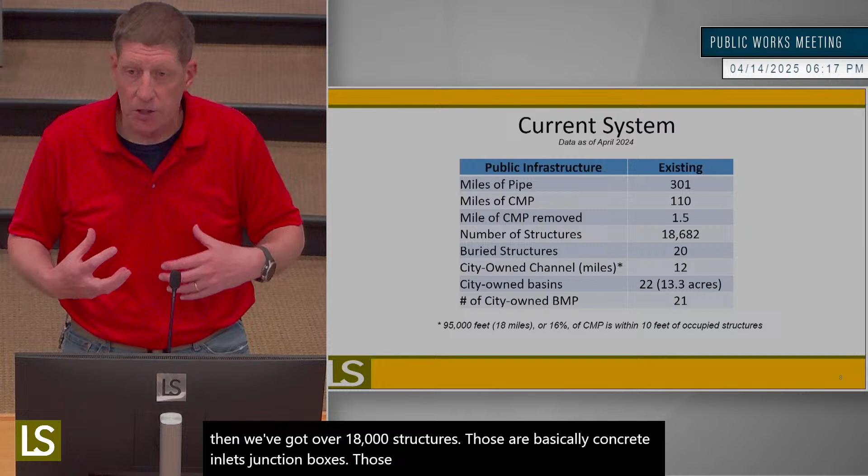With our current system, we're looking at over 300 miles of pipe, of which 110 miles is metal pipe. Over the last couple years, we've removed and replaced 1.5 miles of metal pipe. Then we've got over 18,000 structures - basically concrete inlets, junction boxes. Those are things that have to be cleaned. They get clogged, sometimes you have to pop the lid and clean them out. Buried structures.

City-owned channel - now this is a big issue on level of service. The city does not own stream channels. The very few stream channels we own are mostly in public parks.

We own 12 miles of stream channel. And when we look at basins, these are like detention basins or impoundments. The city has 22 basins that it actually owns, so those are 22 the city has to maintain.

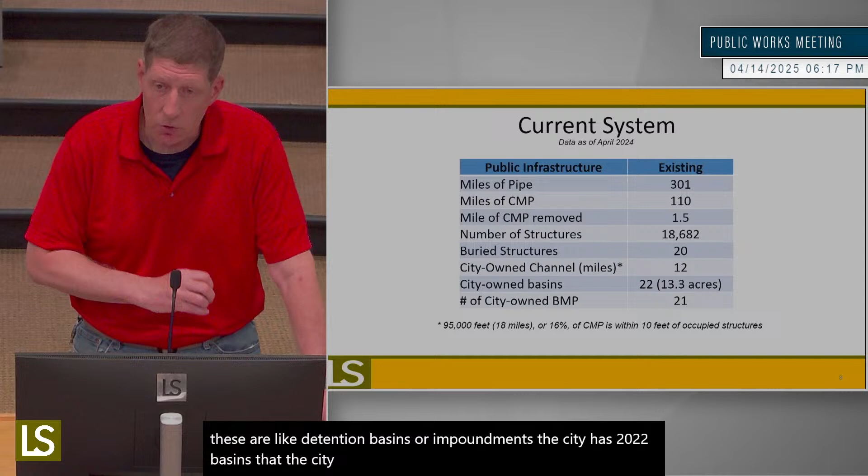Most of the basins in town are privately owned, privately maintained. That's a lot of our service requests, going out and looking at these private basins and trying to explain to people this is their responsibility.

A BMP is a best management practice. An example would be a rain garden. I think we have one over in Williams Grant Park, and one by 2nd and Blue Parkway. These are basically rain garden type places that hold water for a short period of time and filter it, creating a water quality effect.

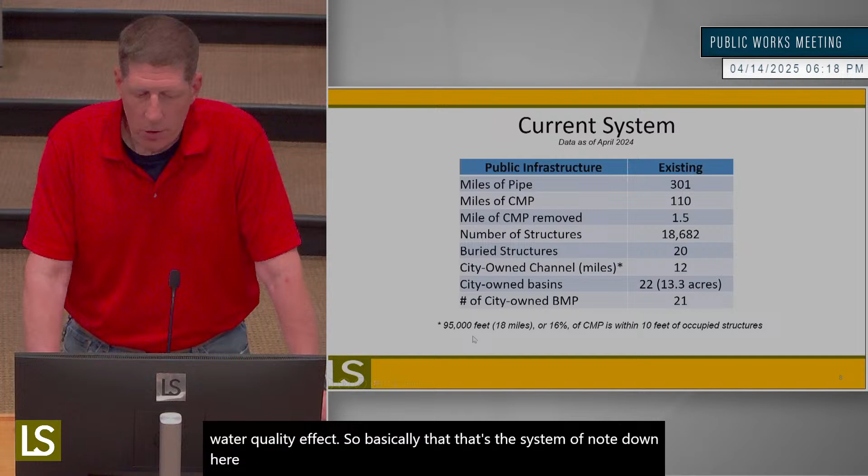So basically, that's the system. Of note down here, out of the metal pipe we have 95,000 feet within 10 feet of an occupied structure. That means it's a pipe running between two homes next to a commercial building, and that's something we're looking to assess and evaluate, because those get very challenging to maintain, especially trenching between two homes that are 20 or 30 feet apart.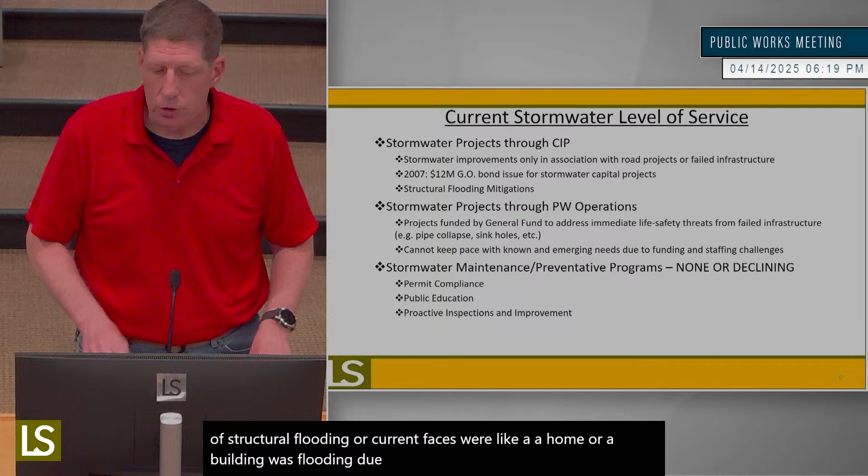Our current level of service typically only deals with failed infrastructure and sinkholes. We may address improvements if it's part of a road project. In 2007 we had a $12 million bond issue for stormwater capital, intended to mitigate reports of structural flooding where a home or building was flooding due to a lack of public infrastructure or failed public infrastructure. That's trying to mitigate that specific situation.

Again, this doesn't address the stream flooding like I talked about on those maps. Then we have public works operations, which generally deals with immediate life and safety threats from failed infrastructure, pipe collapse, sinkholes. Years ago we had a culvert collapse out on Shearer Road, so we had to close Shearer Road—we don't have a choice, we have to stop what we're doing and fix those. The issue is our current operations crews cannot keep pace with the need and demand for this.

The other issue we have to deal with on stormwater is permit compliance. The city has a municipal separate storm sewer system permit, MS4, a water quality permit issued through the EPA and the Department of Natural Resources that we have to comply with. That addresses water quality, and that's what leads to our erosion and sediment control programs and regulations.

We also have a public education requirement, but we currently do not have a public educator on staff. We're also trying to look at more proactive inspections and improvements so we can inspect pipe and do routine maintenance instead of just fixing sinkholes.

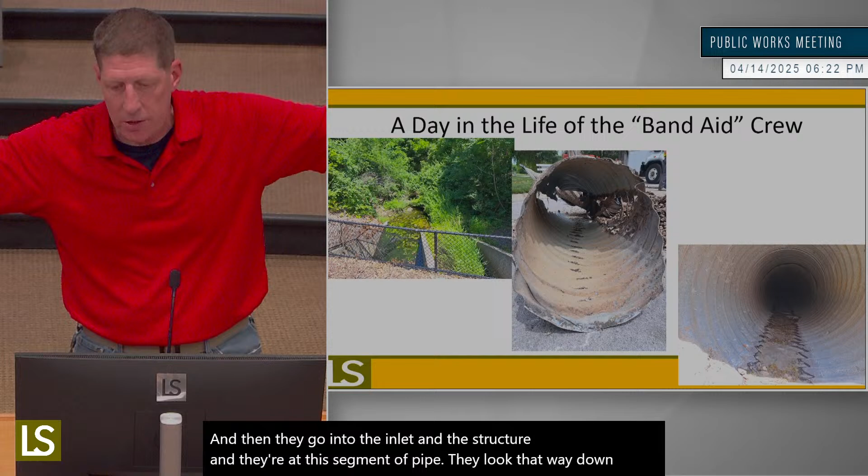And then they go into the inlet in the structure, and they're at this segment of pipe. They look that way down the next segment, which is going under the curb, and they see this starting to go. You can see here where the pipe has started to separate a little bit.

They kind of have to put blinders on and say, no, we're not touching it, because we got to fix the sinkhole here, because that is our level of service at this point. We don't have that proactive maintenance at this point in time.

So when you look at this, this is what the sinkhole looks like from the surface. You can see there's the hole. You can see this is probably about, in the ground, about 18 inches here. This is the curb and the corner of the asphalt.

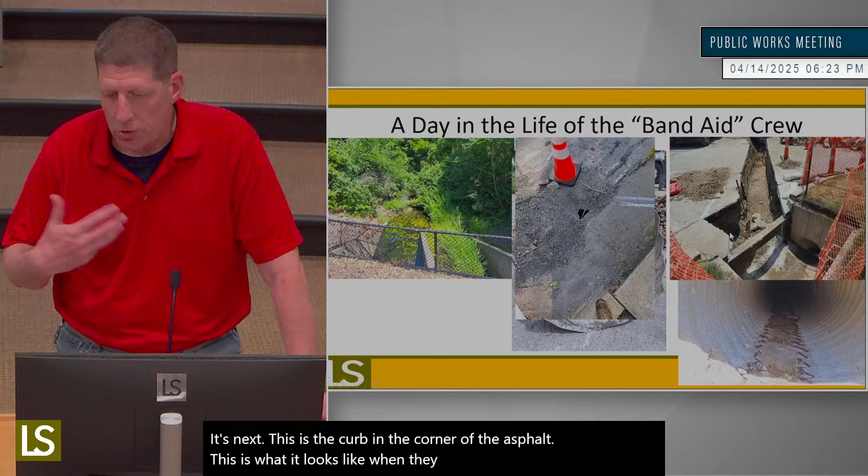This is what it looks like when they get into the repair. So now they've removed the old pipe. Here's the trench going across the street. And of course you can see the street's closed in this situation as they're working the way across.

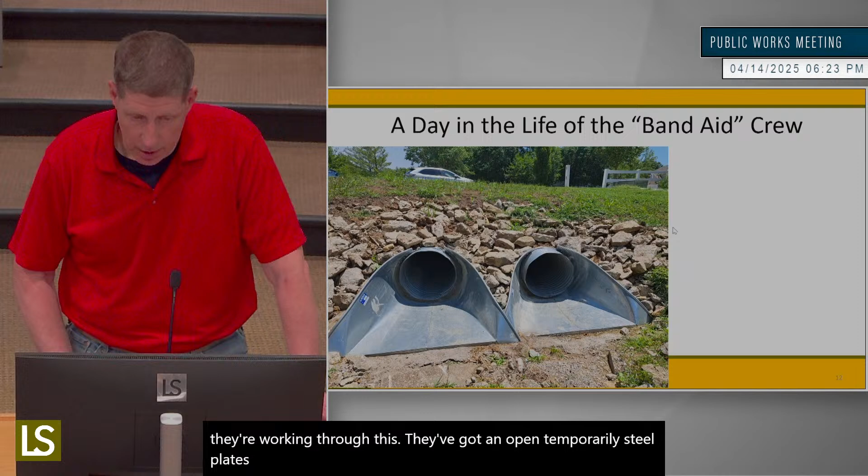They put the pipe in. This is flow fill coming over the top of it. As they're working through this, they've got it open temporarily with steel plates. And so that one's going to finish up fairly soon.

Meanwhile, this one's still sitting here. They haven't touched it. So then they get called over to this location where, yeah, it looks great, till you look in the pipe and you see this separation here.

And they're looking at it, well, it hasn't failed, so there's really nothing we can do at this point. Then you come down here, you look at the other end, and this is the upstream end where it's got all this debris flowing into the pipe. And you look in the pipe, and yeah, we can see there it's offset, a bunch of debris. Not a lot we can do at this point.

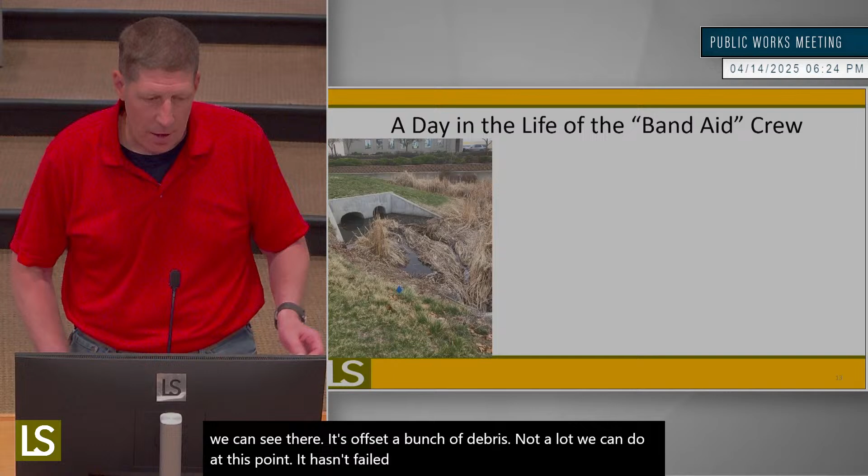It hasn't failed. So then other issues, cleaning out culverts and streams leading up to it. This is an example of a sinkhole in someone's yard. Again, this is still sitting here. We haven't got back to it yet on that culvert.

This is their work trying to clean that. This is actually a basin that the city owns, and so they're maintaining this because a basin has to have volume to hold the water for detention so we didn't get downstream flooding. So that's kind of like a typical day in the life of the Band-Aid crew.

So one of the concepts or terms for dedicated funding is a stormwater utility, a stormwater user fee. The idea behind this is that rainfall impacts all properties. It impacts land use, it impacts waterways, lakes. That's where the water's going to end up, and it affects everyone in the community.

Another way to look at this too is stormwater is not a problem or an issue, it is a resource. I mean, if you think in terms of drought versus too much rain, versus Longview Lake, Legacy Lake, things where we have certain amenities and benefits, rain barrels, how stormwater can be used as a resource for our benefit.

We're looking at the federal permit compliance, potential cost savings. If we're able to maintain things up front, we're not fixing sinkholes later. Moving from that reactive to a proactive type of maintenance.

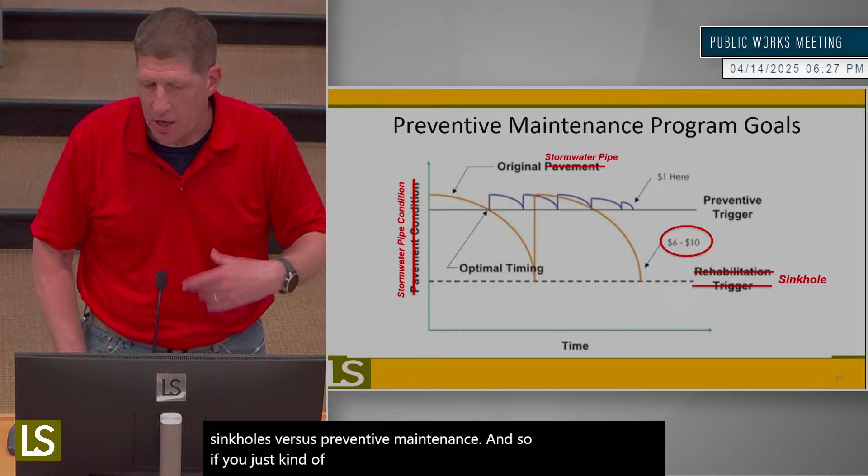Mr. Smager had illustrated preventive maintenance, the idea that if you spend a little money now, you're not spending a lot of money later. It's kind of the idea of sinkholes versus preventive maintenance. If you substitute pavement for stormwater, a sinkhole is when we're removing and replacing pipe—that's that failure.

If we look at just sinkholes as that indicator of reactive maintenance—if we look at all of our stormwater work orders, we had over 3,000, and 380 are related to sinkholes, so that's 10%. If you look at the difference in cost, 10% of the work orders account for a third of the cost.

So anyway, that's kind of what we're looking at—you have this very high cost item with not a whole lot of improvement to the system. I've mentioned some of these things like jetting, slip lining, relining, grouting the bottom of pipes. These are preventive maintenance or mid-level maintenance that could help us in that area.

The other thing we look at is consequence of failure. This is, again, dealing with public safety, health, and welfare. One of the biggest ones—we have road closures. If we have a culvert fail on Ward Road, that is a significant closure. We also look at damage to structures and properties, and emergency repairs, which are obviously more expensive.

Channel erosion—we get a lot of complaints on that, stream channel erosion, because streams move, and it's getting close to somebody's house. Right now, we don't have a mechanism to deal with that.

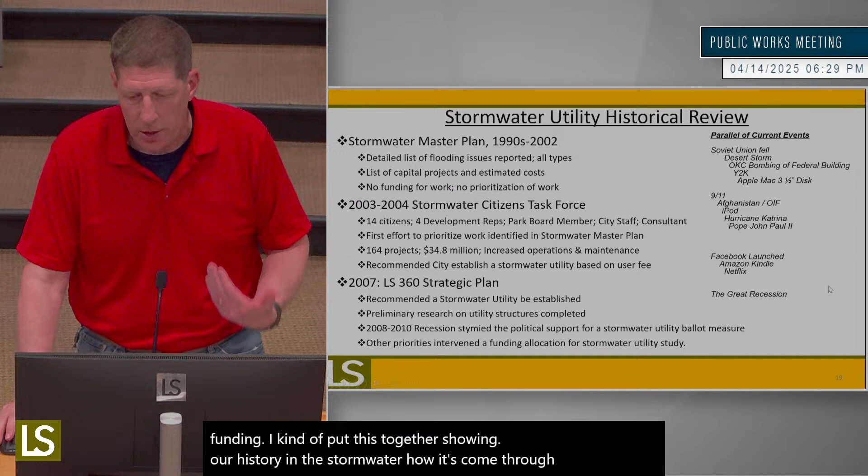Okay, so talking about this idea of a stormwater utility for dedicated funding—I put this together showing our history in stormwater, how it's come through, paralleling current events. We started talking about this back in the 1990s with the master plan, and then 2002 was when it was finally published, which led to the Stormwater Citizen Task Force in 2003 and 4. The recommendation that came out of that was to establish a stormwater utility based on a user fee.

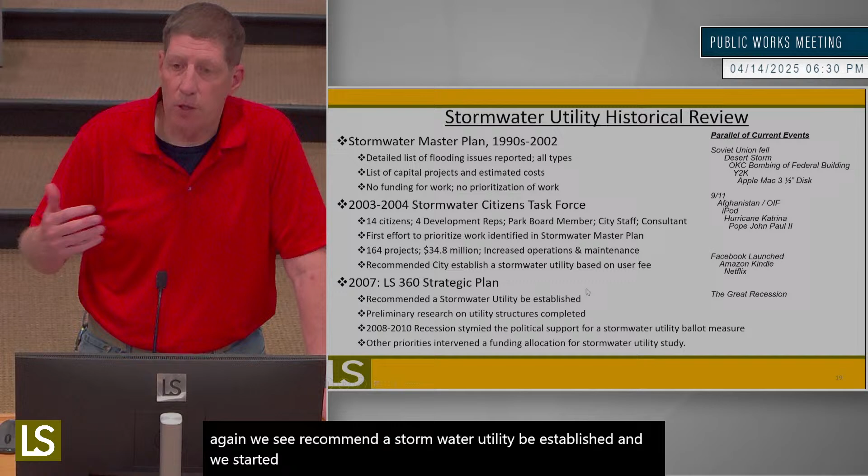Then we come back to 2007, we had the LS 360 strategic plan, and again we recommended a stormwater utility be established. We started pursuing that. Then, of course, 2008 and 9, the recession happens—not a good time.

Then jump to 2016—okay, let's look at this again. We've got more issues, more complaints. In 2017, we put some money into the capital improvement sales tax for stormwater, about another $25 million. Now, again, this is limited to mitigating structural flooding. There's also about $5 million for core CMP pipe replacement.

But we're also looking at things like, do we have other road projects that we can include in this? An example of this was the project we did near Ward and Lee Drive, I guess Longview Road. We did a couple of stream bank stabilization projects as part of this, related to public infrastructure—trying to protect bridges and roads that were being encroached.

Then we visit the strategic plan, the IGNITE plan—again, it proposed a stormwater utility. That's when the actual study, to evaluate how we would set this up, was funded in fiscal year 22. And then this has come back recently as part of the council retreat to re-engage this issue. So this is kind of how it lines up in the strategic plan.

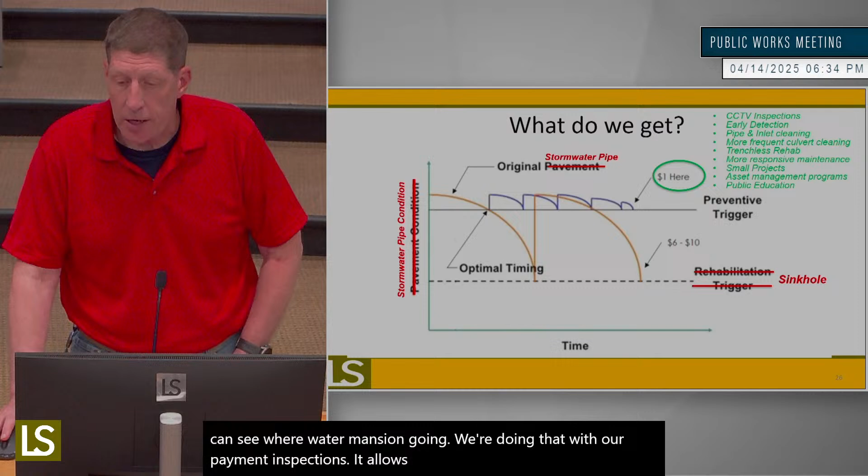It allows us to get out and do the pipe and inlet cleaning. Clean the inlets so we don't have trash flushing to the end of the pipe, and we don't have as much silt and sediment. We're looking at culvert cleaning too. That example I mentioned where we started, and it's still kind of sitting there, allows us more options to get on the proactive side.

And then we look at public education. That's a big part of stormwater management that most every community has, and that would be something we'd be able to ramp up quite a bit.

So if we look at, I talked about lining. Here's a metal pipe before, and this is an example of the problem we had with it. We went in and did an assessment on it. We were able to reline it, and this is what it looks like after the fact. This is kind of like a structural lining.

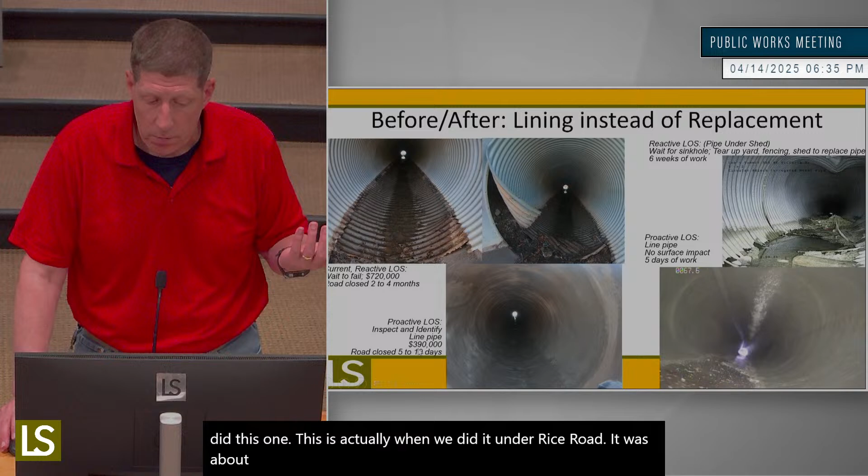If we did remove and replace, it would be about $720,000. We'd have an extended road closure to repair it. When we did this one, actually under Rice Road, it was a fairly large culvert. We're looking at about half the price to do that, with about a 5 to 13 day interruption.

So again, that's kind of where we're looking at some of the things we could benefit from with that dedicated maintenance funding.

Resources again: staffing, technical staff, operations staff, customer service staff, equipment in the field, and then these programs. I think small capital improvements is one we'd be looking at, public education, litter control, beautification. Like when we think about rain gardens, those look nice, but they take a lot of maintenance.

The idea is, how do we convey an unseen need? It's really hard to see something that's underground. There's a lot of common misunderstandings.

We've talked to quite a few people. They don't know what happens when stormwater goes down the street. They don't know where it goes. Or they think that by draining their chlorinated pool water into the inlet, it doesn't have any impact on the stream. They don't know where it's going.

And then we need to look at, okay, if we're going to use a user fee, there's billing and collection. How do we approach that?

So again, with that public engagement, we've had several SWAC members say they'd be willing to help with that. We have several HOAs that were very engaged and would be supportive of that. And then other things we might have going forward.

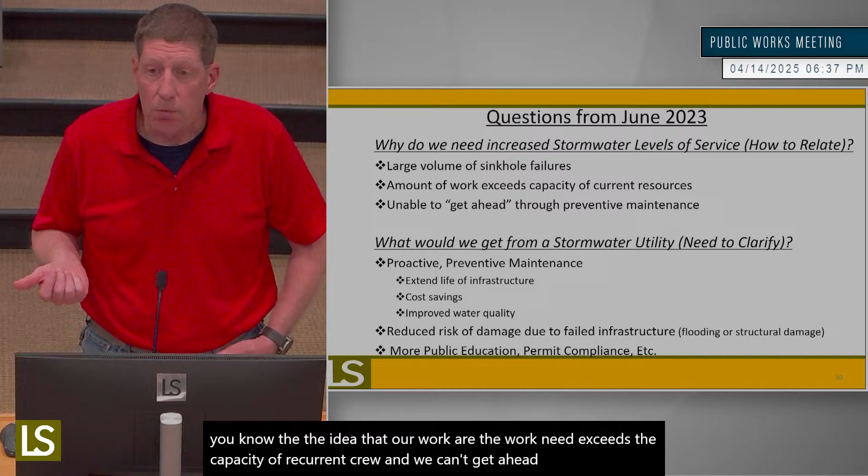So questions we had from last year from City Council: why do we need this level of service? I'm trying to illustrate this as sinkholes, the volume of sinkhole failures, the idea that the work need exceeds the capacity of our current crew, and we can't get ahead. We don't have this opportunity for preventive maintenance.

What would we get? Well, again, the idea is proactive maintenance, reducing the risk of structural flooding, public education, permit compliance, and a lot of that is looking at stormwater as a resource.

What is our longer-term capital improvement plan for stormwater, and what would be included in this utility? Do we want to put more utility funding in, either a sales tax program or a user fee program? Do we want to look at expanding to private property? Do we want to expand to stream banks? How much do we want to expand the capital improvements? And then would we be willing to take on some of these private basins? There are hundreds and hundreds of private detention basins in town. Is that something the city wants to take on? Again, these are policy level decisions that would drive the funding level.

Or do we want to take more of a partnership approach with these private basins? And then how do we bill? There are two common billing methods. One is monthly, as part of either a utility bill or a consolidated municipal billing system. Another is an annual bill on property tax. There are pros and cons to each, and I think these are probably more discussions for the future. And then, how do we update rates as costs change or as needs change?

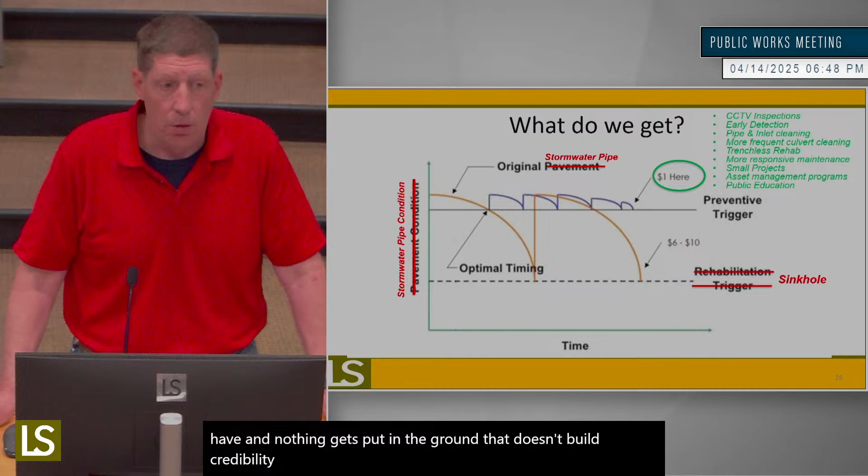Our approach as staff has been, we want to show progress. If we sit here and spend 3 years doing a study trying to figure out what we have, and nothing gets put in the ground, that doesn't build credibility. So we definitely want to, if there's high priority, high consequence of failure issues, work on that now. An example of that would have been the pipe we lined on Rice Road near Hy-Vee. It was high consequence of failure. We can't wait.

I think this presentation is great for us to just study off of. When we get back together to do stormwater, I think it'll be a great framework for us to study and really come up with lots of good questions.

Yeah, go. So with the things that I said, also, I know you're tracking what you're doing in some way, shape, or form. Do we have a system to do that already, or are we going to need to purchase one as we fix it?

I can tell you it's underway. We have a framework. One of the things as part of the study was to build a GIS layer of all the impervious area within the city, so we have that data in GIS. It becomes a maintenance issue, but on the work order history, we have that. We have a rough condition assessment of needs. But yes, we have the framework to build on.